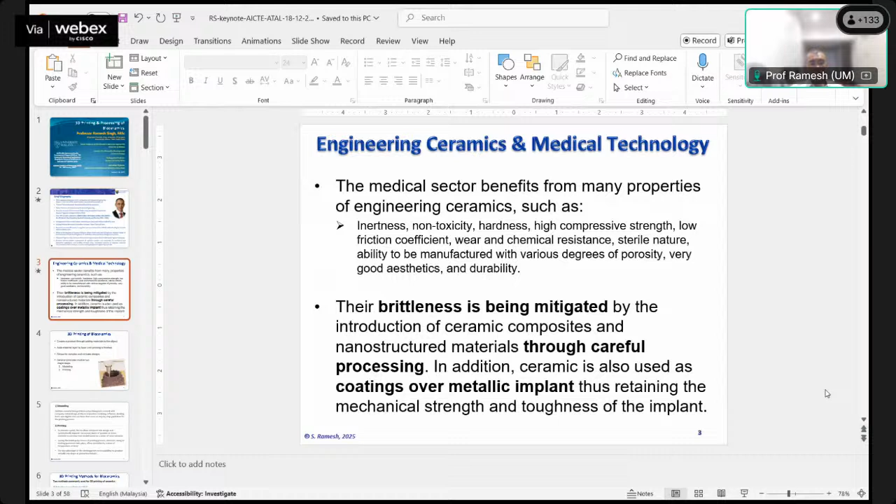There are a lot of ways bioceramics are formed. Traditionally, or the conventional method, is through die pressing, whereby we develop a mold and use powder to compress it into shape. Then after that, we eject the parts, and subject them to subsequent processing like sintering and so on.

Over the years, researchers have also developed injection molding ceramics, where machines are developed to allow, similar to plastic injection molding, you can also inject ceramics to make parts. But again, the limitation is always the brittle nature of ceramics. You always need to mix it with polymer, because this processing requires a flexible stream of material, and ceramic in its own nature is brittle, so it's very difficult.

In recent years, researchers have focused on 3D printing of bioceramics. This 3D printing has its advantage because it allows near net forming of structure. It builds layer by layer, just like rapid prototyping of metallic components, so it's of a similar nature. This process creates an object by laying layers of material until the full structure is formed, allowing for complex and intricate design of components.

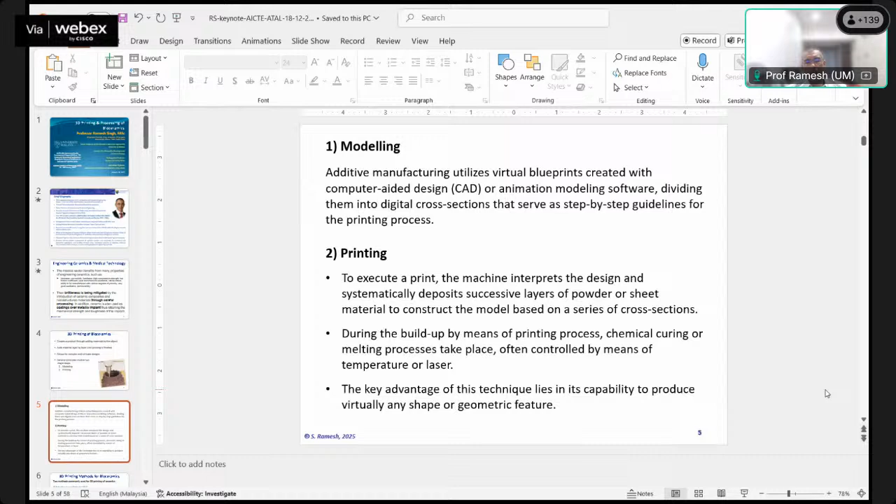During the printing, a layer of powder is laid layer by layer based on the model you have developed in your CAD or animation modeling software. There are two main common methods used for 3D printing of ceramics.

The two common methods are SLS, selective laser sintering, and FDM, fused deposition method. SLS takes after rapid prototyping, where we use laser as the heating source. The structure or component you want to make is sintered simultaneously as the object is being printed using laser. The laser helps melt the particular material, especially the ceramic material, at a particular temperature and deposit it onto the surface as it builds.

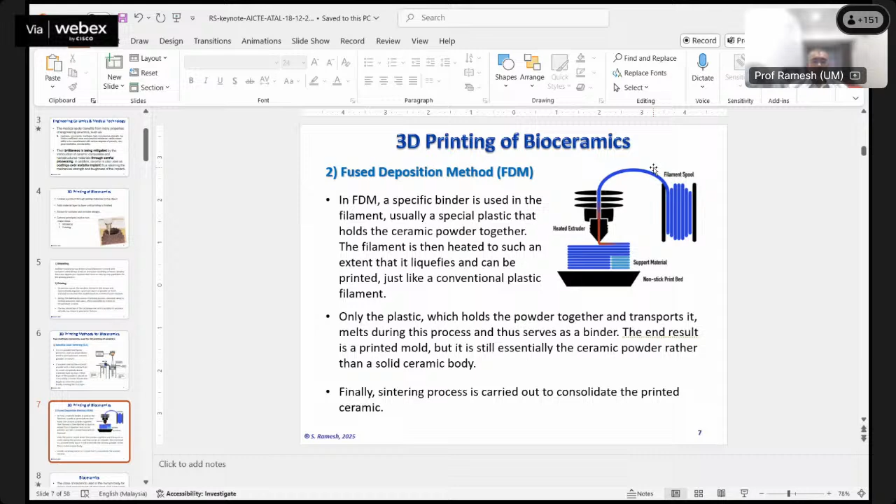In Malaysia, we don't have a company that develops FDM for ceramics, but we have a lot of FDM used for polymer-based printing, so that is not an issue. In fact, one of my PhD students, even in China, has made the material and made the machine himself. You can go to YouTube—there are a lot of channels that teach you how to make a simple printer so you can print polymeric materials. But for ceramics, as I said, the challenge is always with the filament.

In terms of bioceramics, when we talk about ceramic materials, there are many classes: traditional ceramics, advanced ceramics, and the class of bioceramics. My PhD was not in bioceramics—although my degree is in mechanical engineering, I took a project using ceramics for mechanical applications, focused mainly on high temperature and high wear resistance applications like cutting tools. During my PhD I developed zirconia ceramics for cutting tools, but subsequently I branched into bioceramics.

These are classes of ceramics that can be used in the human body for replacement of diseased or damaged parts. Normally people get involved in accidents and break or crush their bones, and these bones can never be replaced in a natural form—it will take a very long time, or maybe never happen. Therefore, to assist in the healing process, bioceramics have been developed and used as a substitute.

This allows the hard tissues to heal, and especially calcium-based bioceramics allow fusion into the bones and the human skeleton structure. So there will be infusion, and therefore it becomes permanent—the body thinks that this bioceramic is part of the skeleton structure.

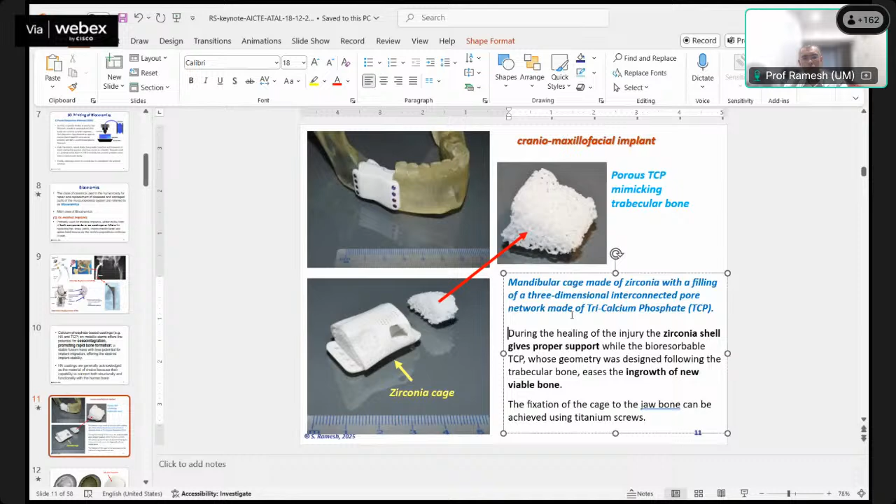For skull implants as well, especially for cancer patients who have cancer in the brain, in order to remove the cancer the doctor normally has to cut through the skull, creating a hole. Thereafter, in order to protect the soft tissues of the brain, in the past metal was placed over the section where it was cut in order to protect it, but these days we can use bioceramic because this area will not be subjected to loading.

Obviously once someone has part of their skull removed and replaced by a bioceramic, the person cannot have an active sport life. Because although hydroxyapatite has the strength and hardness to protect, for example to play football and so on it's not advisable, because it can crack when the patient hits the ball. So normally it is used only to protect the soft tissue of the brain to allow healing to take place, and this remains permanent there.

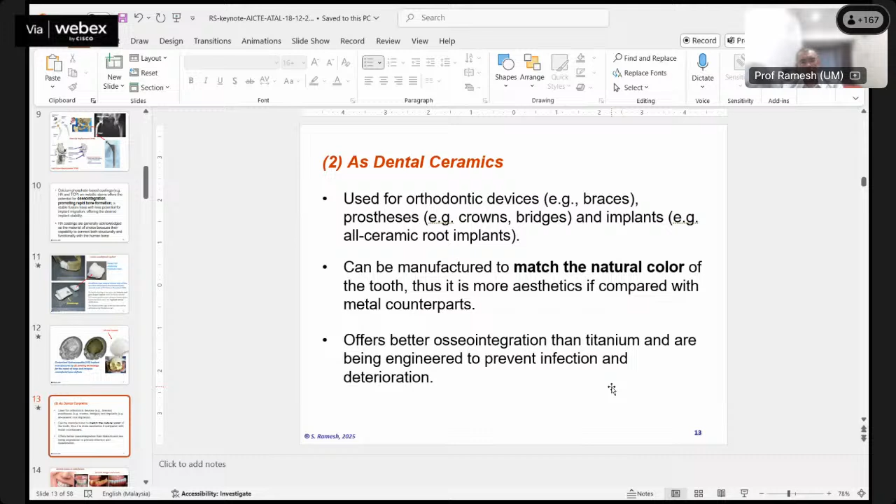Bioceramic can also be used for dental applications, and this is something I have worked on with one industry in order to develop artificial implants, for orthodontic devices, braces, prostheses like crowns, bridges, implants, all-ceramic implants, and so on. This is very common these days. Especially for adults, once we lose our tooth, we will never be able to have a natural tooth again, so we need to replace it with an artificial implant. Ceramic serves very well in this section. You can also use titanium, and in the past titanium has been used, but these days ceramic has been used.

There are also titanium implants where the implant is made out of metal but the head is made out of ceramic. That's also possible, but the problem with the metallic implant is that when it's screwed into the jawbone, over time there will be an effect of loosening because the metal is very hard, causing wearing of the bone structure. Over time as patients bite and eat, there will be movement, so after certain years there may be a need to replace the stem with a bigger diameter stem because of the loosening.

But with all-ceramic implants, it tends to allow osteointegration to take place, especially if it's made out of hydroxyapatite, or the stem is coated with hydroxyapatite. This allows good fusion, good interlocking with the jaw bone material, so it binds well and holds it in position, and therefore you won't have this loosening effect. That's why a lot of people opt to use all-ceramic dental implants.

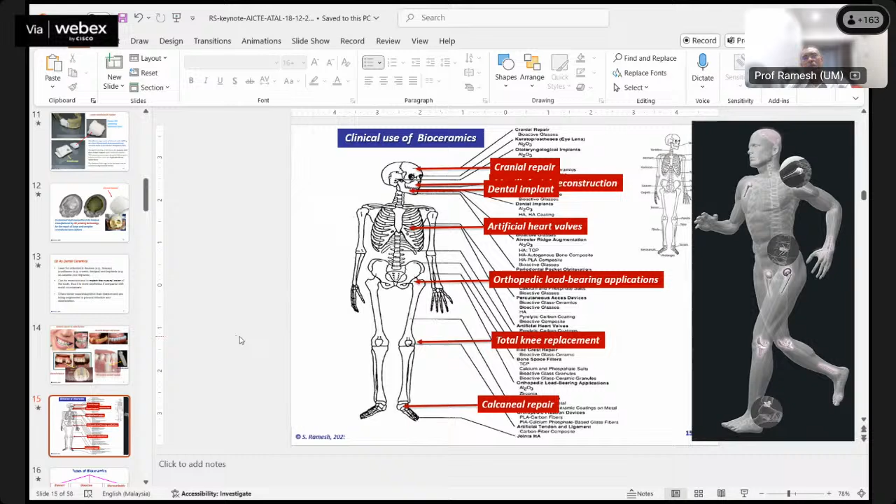So these are some clinical uses of bioceramics. There are mainly three types of bioceramics: bio-inert, bioactive, and bioresorbable. Bio-inert means it is completely inert - it does not have any chemical reaction with the body. Bioactive means there is some chemical reaction whereby osteointegration can take place - there is integration when we say bioactive.

When we say bioresorbable, what it means is that it is there for a temporary period, and thereafter it gets absorbed by the body, like TCP, tricalcium phosphate, a bioresorbable ceramic material. So these are the three classes of material.

Hydroxyapatite has been used because when we zoom into our bone structure on a micro or nano scale, we see that the crystal that makes up the collagen fiber inside our bone consists of crystals of hydroxyapatite. That's how researchers realized that if we can develop artificial calcium phosphate based material, the body will accept that particular ceramic. Based on this understanding of bone structure, hydroxyapatite has been developed and is being used very widely.

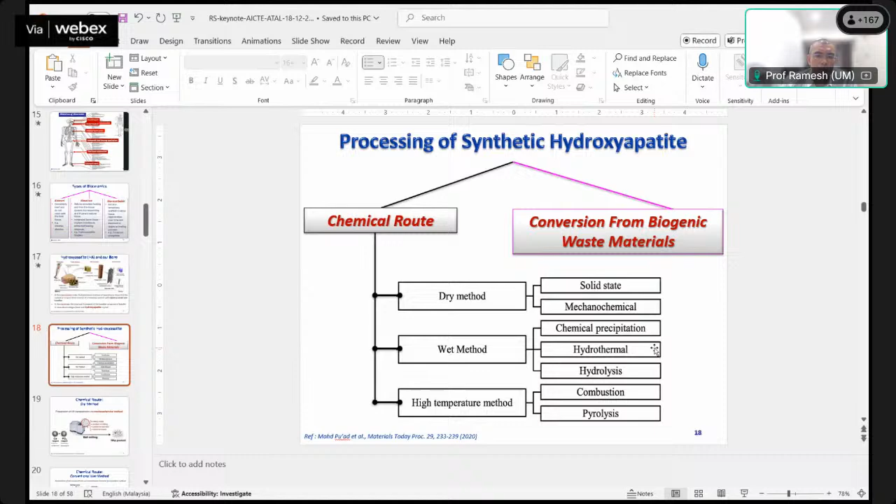This high temperature method is good for research—it's nice for publishing papers and so on. But most of the hydroxyapatite available in the market is developed through the chemical precipitation method, because it's easier, easy to control, and you can scale up.

These few slides show the principle of each of the techniques, so I'll go through them a bit quickly, starting with the mechanical chemical method—basically, mechanical means there is a mechanical assistance.

So like ball milling or planetary milling, this is through a mechanical form, that means rotation. Electrical energy converts into rotation energy through some mechanical device which allows the rotation to take place. That allows the chemical reaction between the agents we use, typically a calcium agent and a phosphate agent, calcium carbonate and dicalcium phosphate. During this mechanical chemical process, the byproduct will be hydroxyapatite.

Then we also have the chemical conventional wet method. When we look at the wet method, this is very straightforward, the chemical precipitation method. I am one of the early pioneers in this chemical precipitation method. This has been done for almost 20 odd years, 25 years ago.

It's very simple. All you need is a calcium agent, most of the time we use calcium hydroxide. We mix it in liquid, so we dilute calcium hydroxide into liquid, and then we take phosphoric acid, we dilute it in liquid, at a certain ratio. This is where the challenge comes in, how we control those ratios.

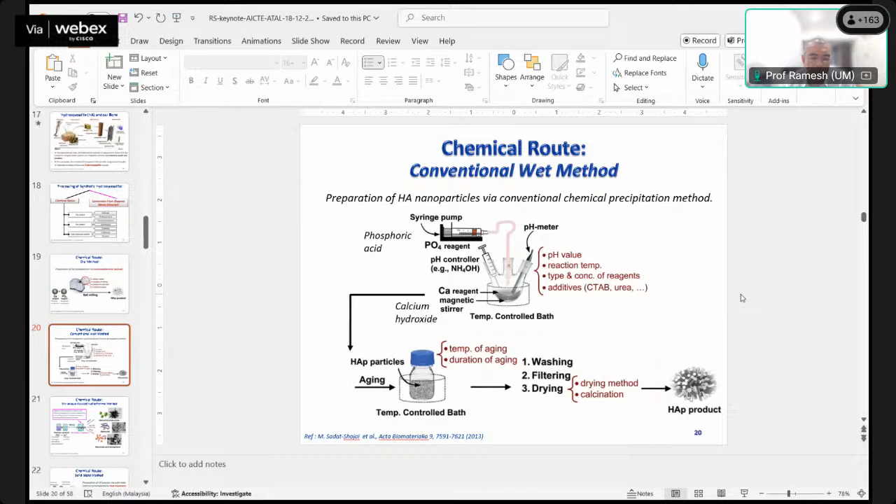I've not done the microwave assisted hydrothermal method. I have always stuck with the chemical precipitation method because, based on the readings I've done, the chemical precipitation method is much more superior in terms of yield, reproducibility, and quality.

Rather than using other techniques. Other techniques are good to publish papers. You do a little bit of mixing here, change a bit of parameter, you can write good ISI papers. You get a nice structure and then you can publish. But for application, I think it's a bit difficult to scale up in order to control the required morphology.

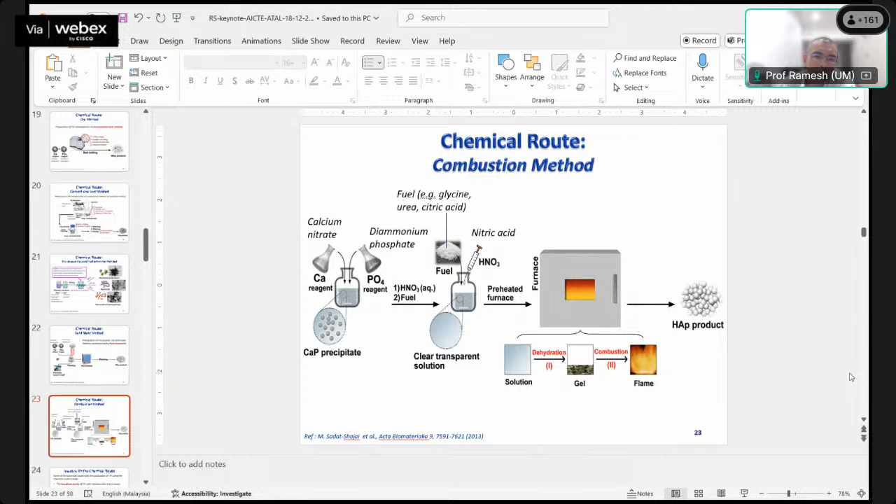You get very little yield when you use this technique, but for research, for a PhD or master's research, it's fantastic. You get quite good results. You can play with the parameters and get different morphology, different properties. You sinter them, test them, then put them through biocompatibility studies, so you get a lot of results. It's nice for publishing papers, so a lot of people have used this technique mainly to publish, making comparisons showing the viability of the combustion method. So these are some of the issues with the chemical route.

Remember, there are two routes to produce HA. One is the chemical route, and there are some issues with this route. One issue is the purity of the HA through the chemical process. Normally the powder produced from these techniques, even chemical precipitation, is not highly crystallized, so you need heat treatment afterward to obtain a highly crystalline material.

You also have problems with agglomerates with this chemical route, as I mentioned, that's always a challenge, along with instability of the hydroxyapatite itself. As you saw, different structures form - some look like a star, some rod-like, some spherical. Normally we find the rod-like structure is more stable than the star-like or round circular particle forms. So the rod-like seems to be very stable.

Depending on how you process them, you get different morphology, and that influences the stability of the hydroxyapatite phase when you heat treat or sinter it. Sometimes you get secondary phase calcium phosphate formation, like tetra calcium phosphate (TTCP), or even calcium oxide being formed. These are considered impurities, although the body can accept TTCP or CaO. But when used for a solid HA implant, which we want to remain as an implant for a long period of time, once degradation takes place and HA transforms into a secondary phase, it causes an issue - it loses its integrity.

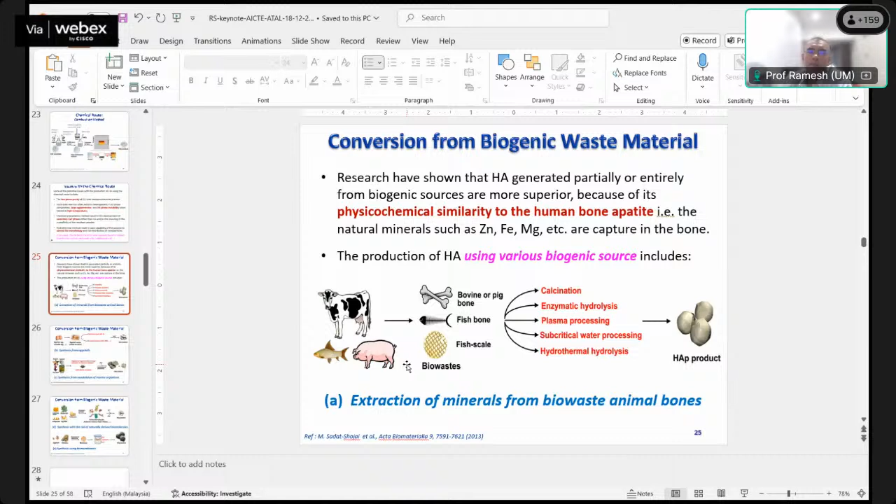I've worked with bovine as well. I haven't tried pig bones, because from research that's been done, it seems pig and chicken bone don't work as well. I've tried chicken, but chicken bone is too soft, and the hydroxyapatite byproduct made from chicken bone does not have very good mechanical properties. Fish bone is the same - it can be a good calcium source, but when you test the mechanical properties of the resulting hydroxyapatite, it is not as good as using eggshell or bovine bone.

So, synthesis from eggshell - a lot of my work has focused on using eggshells, whereby we clean and crush the eggshell, burn the calcium carbonate away, and get pure calcium. We calcine them. It gives out a very terrible smell when you burn eggshell, so you need a proper enclosure for extraction when burning eggshell.

And the byproduct is a white color powder, and that powder is pure calcium. Subsequently you subject it to normal chemical processing, mix with some phosphoric acid and so on, go through the chemical process, and you will be able to obtain HA product.

So synthesis from eggshell is very straightforward. You can also use shells - this is another method that has been used, but again it is more for research purposes, because of the issue of yield and the technique involved. Sometimes these techniques use toxic chemicals, and the byproducts are toxic, so it is not viable for scaling up. So we can use marine organisms in order to convert their calcium into HA product. That's possible - these are some of the options.

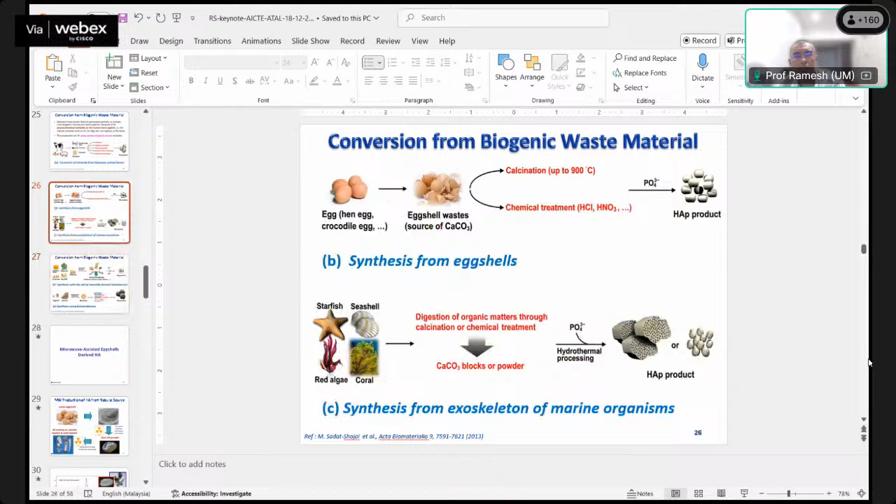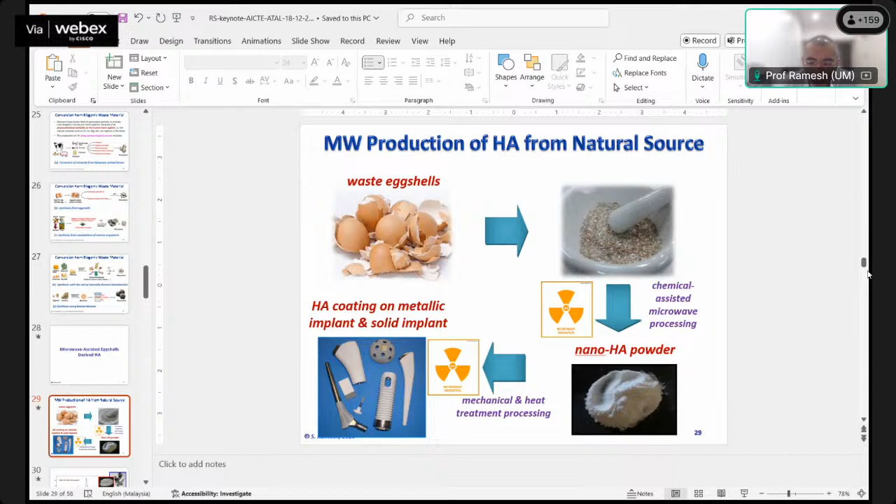All right, so these are the powder. As you can see, this is the HA powder that we developed. We produce nano powder, so they are mainly rod-like powder. And this is the micrograph of the nano powder that we have developed in the lab.

So one day I had a problem with my wisdom tooth - that was sometime years ago, maybe about 10 or 15 years ago. While my tooth was getting extracted, I was thinking of the work I was doing. And when the dentist threw the pieces of the tooth into the beaker, I looked at it and said, hey, I told the dentist I would like to take the tooth. He said, okay, it's up to you. So what I did was grind the surface and do the X-ray.

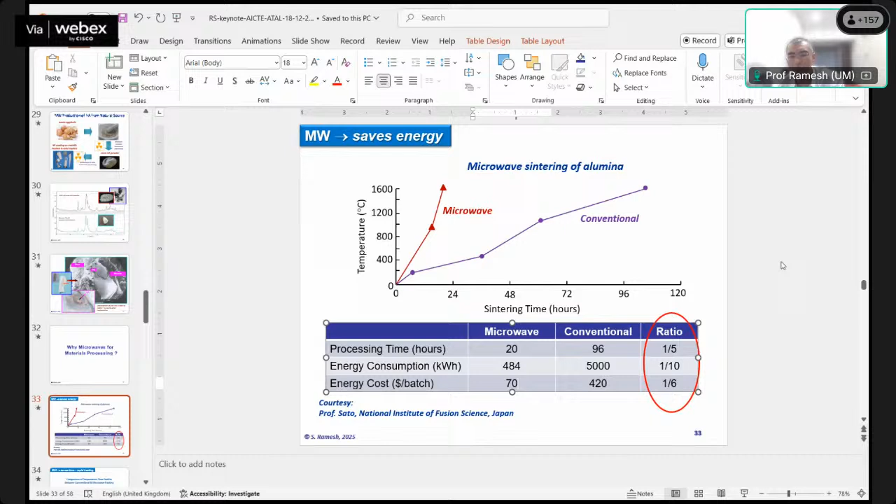The energy consumed is obviously less when you use fewer hours, and of course the cost is related to energy usage, so it's cheaper. It's 1/6 cheaper, 1/10 lower in terms of energy consumption, and 1/5 lower in terms of the time to process alumina ceramics. So rapid heating - here's a profile.

Do you know that with a household microwave, with proper insulation and a little bit of modification, using a 1200 watt or 1500 watt rated household microwave, you can actually get temperatures as high as 700-800 degrees centigrade? But you need proper insulation and so on.

So for research purposes it's nice, but for commercial use you would need a proper microwave furnace. So I have a proper 6 kilowatt microwave furnace - it's a big furnace which we use for a lot of microwave work.

So here's some principle. When we look at the differences in heating mechanism, microwave is basically volumetric heating. Once every particle receives the energy, it starts to create heat, as compared to conventional, where heat is transferred from the outer surface to the inner surface through a radiation and convection process.

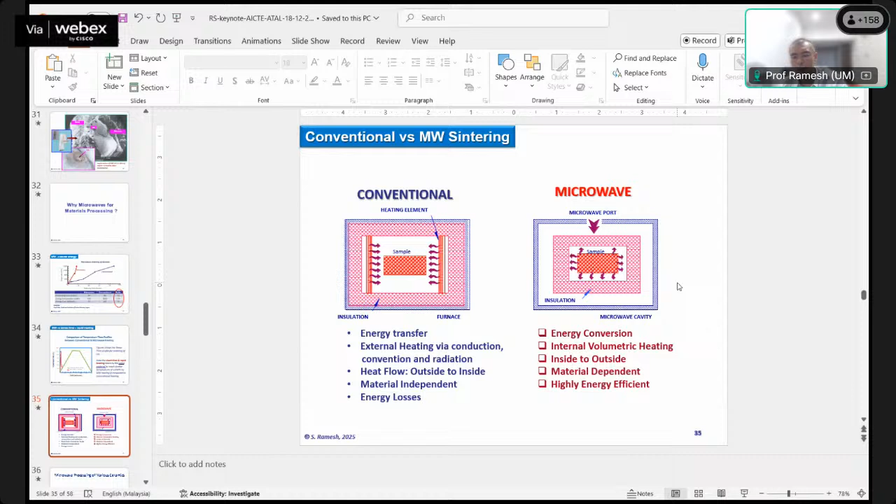So that's some of the challenges with sintering ceramics using microwave. Now some examples of microwave processing: alumina. As you know, alumina needs to be sintered at high temperature for a very long period of time.

As a result, you have grain coarsening. When the grain gets bigger, you lose mechanical strength. So this is the issue, and the challenge with sintering alumina is really to minimize grain growth so that you have higher mechanical properties.

This typically shows the structure of conventionally sintered alumina, where it is not possible to get high density at a low temperature of 1350 degrees holding for 2 hours. At 1350 for 2 hours, the density is only about 65% dense, and the structure is porous.

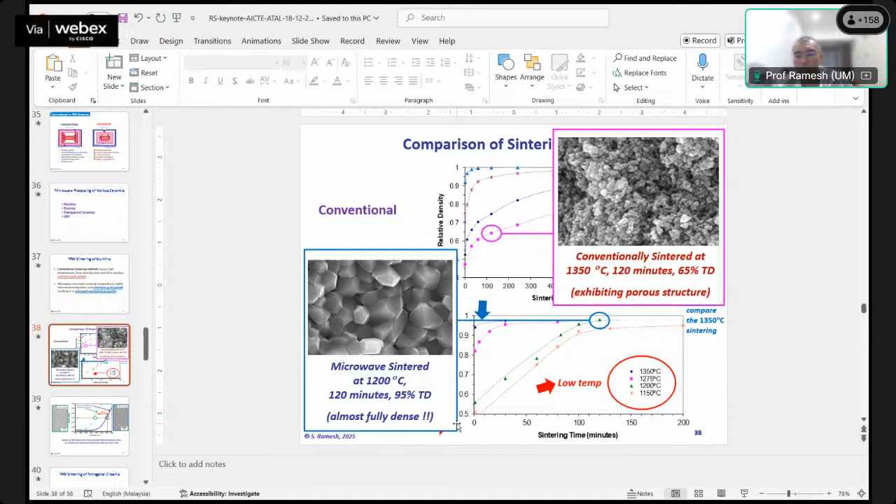But on the same count, we find that when we compare with microwave, keeping the time same at 120 minutes and the same temperature of 1200, in this case different temperature, this is higher, this is lower. So for the same condition, except for lower temperature, the density is already 95% dense. So we can see there is an advantage of using microwave to sinter alumina.

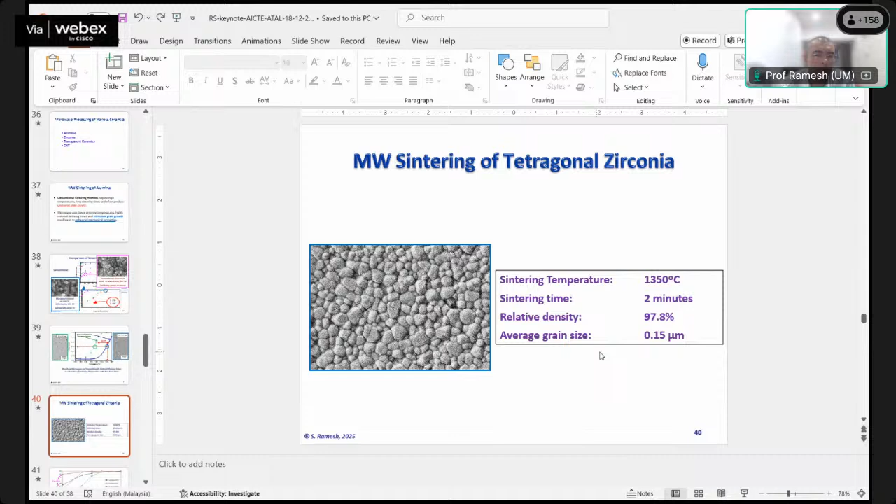For zirconia as well, we have done a lot of work. You can keep at low temperature for as low as 2 minutes. We are able to obtain 97%, 98% dense with an average grain size of about 0.15 microns. So this is another work I've done using microwave. You know that if you work with zirconia, it is not possible at 1100 degrees centigrade to get at least 95% dense, right? So part of this PhD work was to try to enhance the low temperature sintering capability of zirconia.

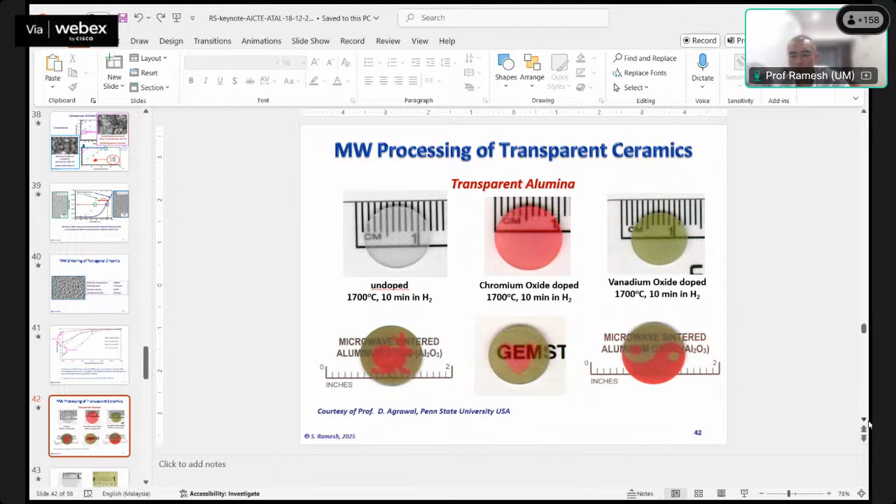These are some examples where the ceramics are fully dense and tend to become transparent. These are not from my lab, but from my collaborator, Professor Dinesh Agrawal from Penn State. He is our professor icon, and he works closely with me in the development of this microwave, because his group is the pioneer. Those who are familiar with Professor Dinesh Agrawal know he has just retired from Penn State, so he doesn't do much research these days, but I'm still in very close contact with him. So these are some of the pictures he has sent of work done on various different ceramic materials. As you can see, they are transparent.

And this is one area we must take care of, because if we put an implant where the maximum load is undertaken by the implant material and not by the natural bone material, eventually the natural bone material will get weakened. Our bone structure needs to be subjected to loading. If it is not subjected to loading, it tends to lose its calcium. And that's where, as I mentioned earlier, the body thinks that when you don't exercise, that's why as you get older you need to really do a lot of exercise, because you should not allow your body to think that your skeleton structure does not require strength, and therefore the body will extract calcium from the skeleton structure.

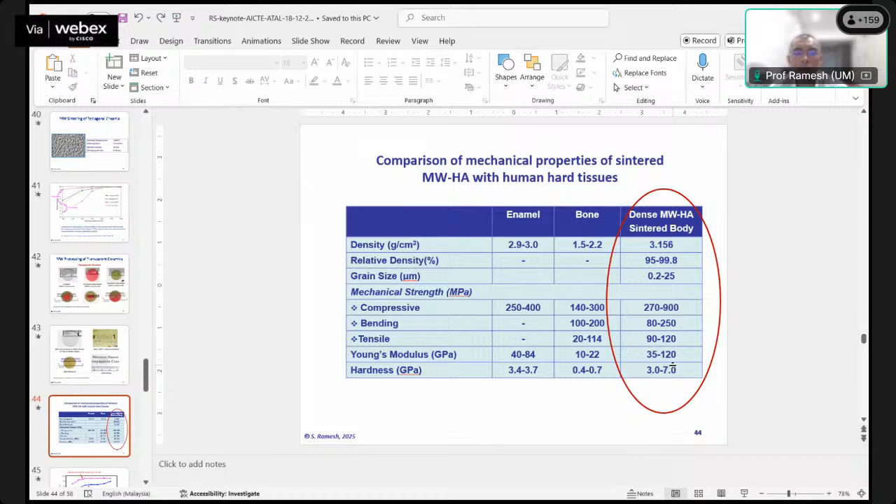So if you're active in sports, that sends a signal to the body that you need strength in your bone, and therefore your system will have to work hard to extract calcium from the food rather than taking it from the bone. So these are other properties.

Just to compare, microwave sintering at 30 minutes at 2.45 gigahertz, as compared to conventional sintering at different temperatures, you can see it is much better in terms of densification. Conventional is done for 24 hours, microwave is done for 30 minutes at the same temperature, so you can see the improvement in densification.

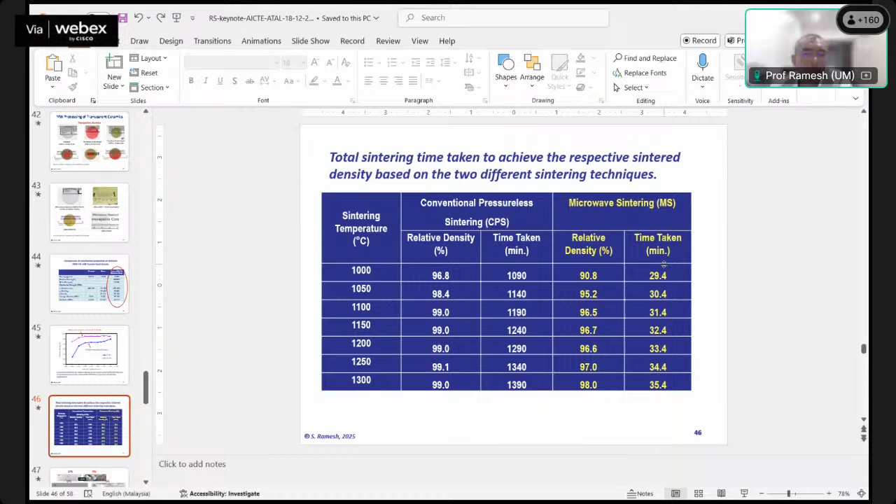This shows the similar thing in table form. I think what I want to highlight is, if you look at 1000 degrees centigrade with conventional sintering, in order to get a relative density above 90%, it takes about 1000 minutes, as compared to microwave, which takes only half an hour to get above 90% dense. So the advantage is there.

All right, so that's on hydroxyapatite. We also work on zirconia. Zirconia can exist in 3 structures: monoclinic, normally in the powder form, and as you heat it up it goes into tetragonal and then cubic, and on cooling it transforms back. This is for pure zirconia, showing the polymorphic transformation that takes place.

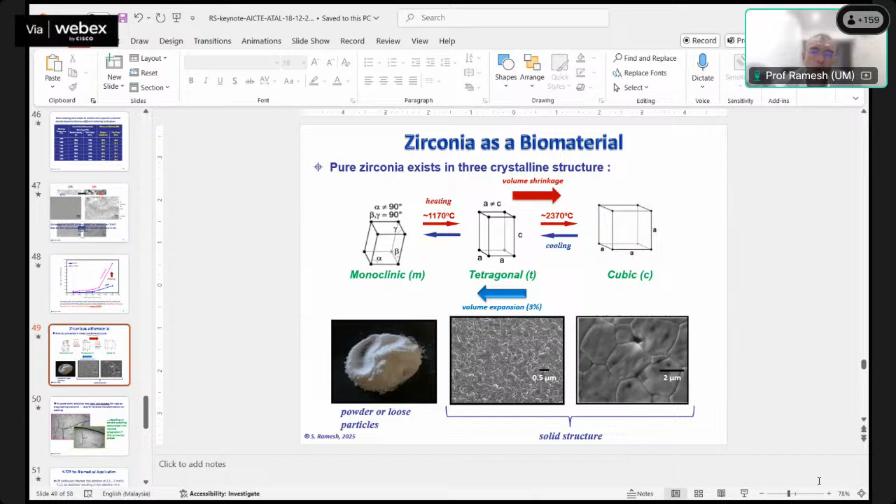In order to ensure that the reverse transformation does not take place, pure zirconia is normally not used in its pure form. It is normally doped with a stabilizer like yttria, cerium oxide, or magnesium oxide, and so on. In the pure form it is not used because on cooling there is expansion, from tetragonal converting back to monoclinic, and as a result there's severe cracking.

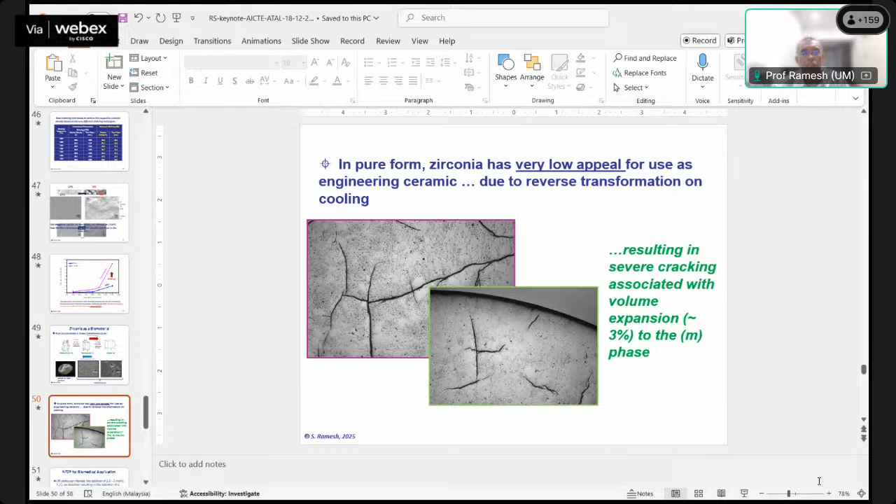So normally for biomedical applications, it's the tetragonal zirconia polycrystal, TZP, or Y-TZP, where Y means the stabilizer. It's stabilized with 2.5 to 3 mole percent yttria. With this stabilizer, you're able to retain the tetragonal structure at room temperature, giving the highest mechanical properties.

So this is some comparison of Y-TZP, the tetragonal zirconia polycrystal, with some typical metals. As you can see, the Young's modulus of Y-TZP is almost similar to steel, and that's why Y-TZP is sometimes known as ceramic steel.

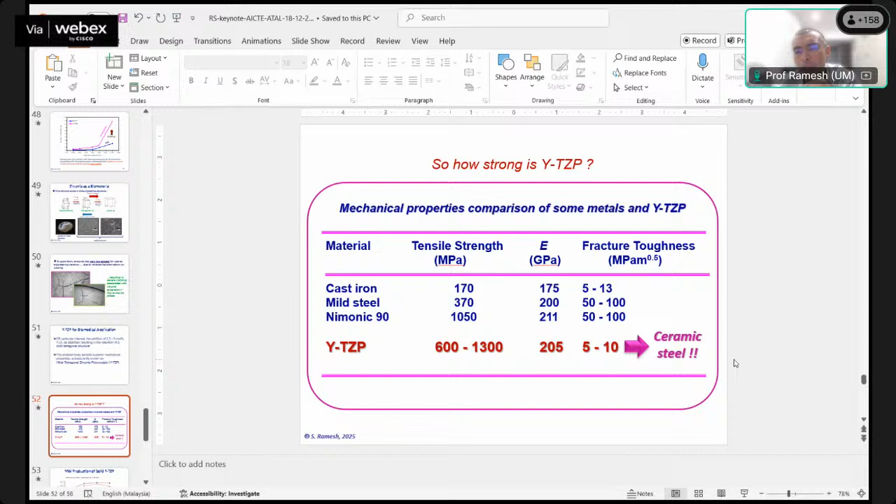Okay, I don't know if I can play this. Let me try. Can you guys see this?

Yes sir, yes sir. Okay, some of the applications: grinding media, sleeves, pump face, hip replacement, knife. This is a cutting tool that I've developed for commercial purposes, and of course for dental implants.

We have also made porous zirconia. This is for a company where I'm a consultant, Best Tool Manufacturing in Thailand. Can you guys see this figure?

Yes sir, you can see this, huh? Okay, this is another work that I've done. These are drill bits, zirconia drill bits that I have developed together with the company in Thailand. I'm a consultant for this particular company, and what they have done is make ceramic zirconia cutting tools for drilling purposes for dental use to replace the metallic tools. Our tooth is very hard, and during replacement, using the metallic tool wears off very quickly, so the company developed zirconia drill bits for dental application.

So I helped them with the processing part, identifying the best sintering conditions for their tools, selecting materials, and developing strategies to enhance their mechanical properties. These are other tools that have been developed by the company in Thailand. And that's it. I think I've taken enough time.

So a lot of my work is really focused on developing this particular ceramic material for mechanical-based and for biomedical-based applications.

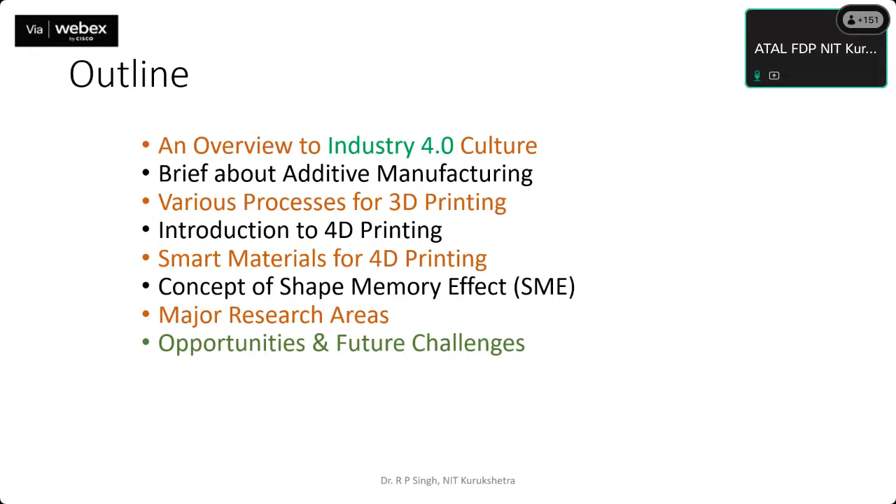Then we will discuss various major aspects and opportunities. Here, the very basic fundamental is the paradigm shift from Industry 1.0 to Industry 4.0, which is the current perspective. In the very beginning, in the late 18th century, it was the era of mechanization and the introduction of steam and water power. One century later, in the late 19th century, it was the time of mass production assembly lines and the utilization of electrical power. Next came Industry 3.0, the later phase, when automation came into picture with the use of computers, IT systems, robotics, etc.

And next to that, it is the current scenario where we are dealing with the smart factory, the autonomous systems, Internet of Things, machine learning, etc. in the current perspective. So these are the different paradigms, how things are just being shifted from Industry 1.0 to Industry 4.0 up to the current perspective.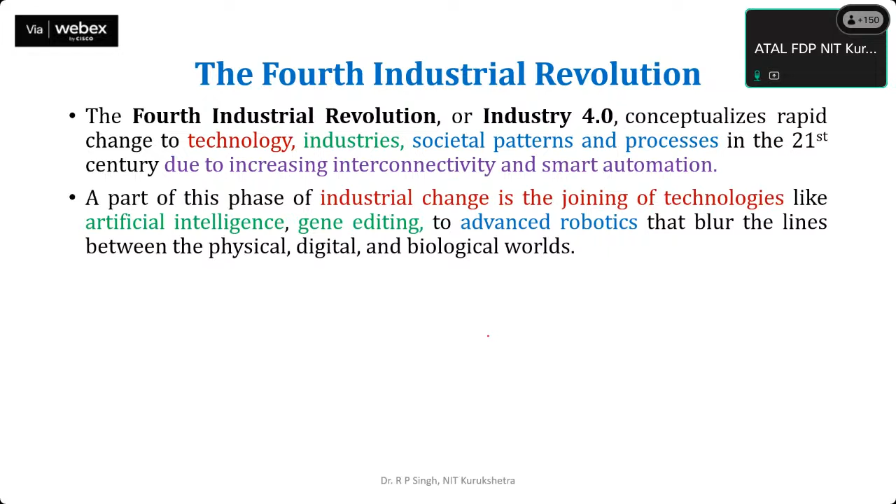So it is the time where we are dealing about the technology, industry, societal patterns and processes in the 21st century due to increasing interconnectivity and smart automation. A part of this industrial change is the joining of technologies like artificial intelligence, gene editing, up to advanced robotics. So we are dealing with all these aspects through ongoing automation of traditional manufacturing and industrial practices.

It is very interesting here. This integration is all about improving the overall communication, self monitoring, and the use of smart machines, etc. So as you can see, Industry 4.0 has various enablers and smart technologies for the fourth industrial revolution so far.

So it is associated with autonomous robots, simulation aspects, system integration, IoT, IIoT, big data analytics, cloud computing, and very interestingly, it also has the consideration of additive manufacturing. So you can see it being highlighted here. That's an integrated part of Industry 4.0 and we can't ignore it. To enable the fully functioning of Industry 4.0, this aspect cannot be ignored.

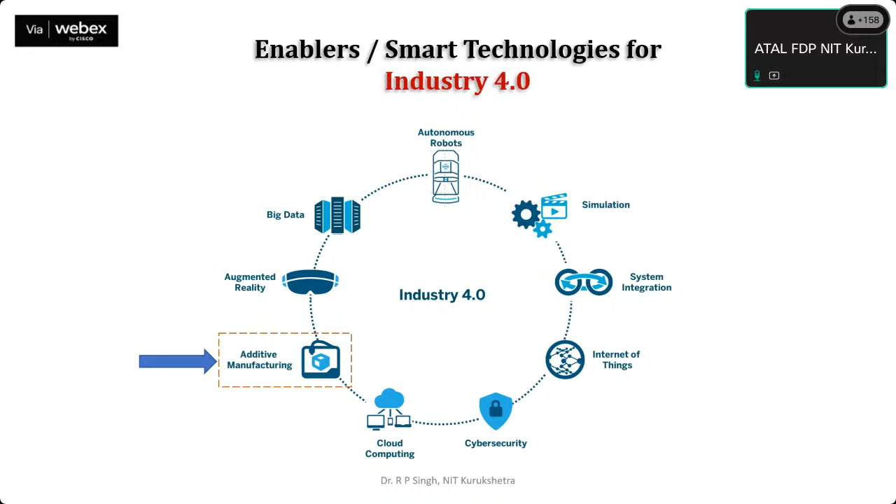Obviously, on the basis of this particular theme, this FDP was planned up to the applications in the biomedical area. It is also called 3D printing, layer by layer. Various experts, Dr. Naren, Piyush, Dr. Sundeep sir, and many others, even Kote sir in the previous session yesterday, discussed various aspects of it. So it is often called digital manufacturing, rapid prototyping, solid freeform forming, etc.

So it just starts with forming a CAD file, STL, and the sliced version. Based on that, it is then additively manufactured layer by layer, and if the finishing of the end part is not so good, post processing can also be applied.

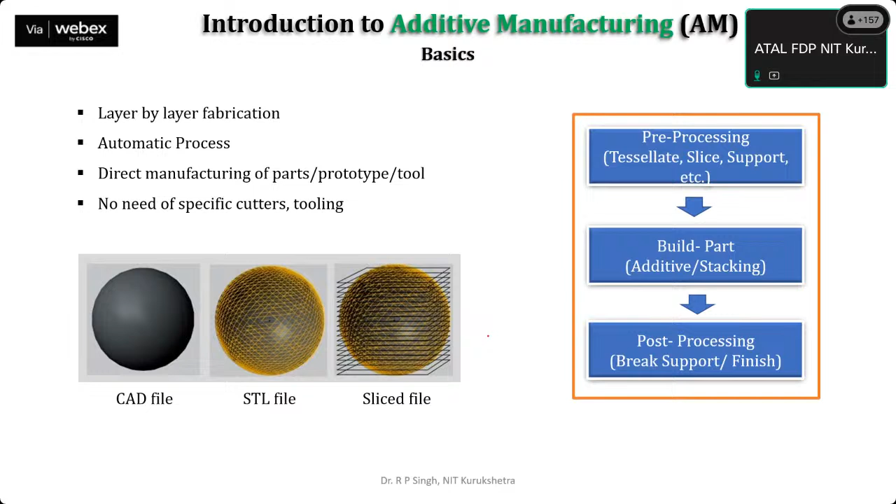Obviously, in our previous class yesterday, Piyush very clearly highlighted the aspect of support systems and post-processing, and how and where it is applicable to 3D printed parts.

So again, this is a one-to-one discussion about vat photopolymerization, but since a lot of discussion has already been made by our previous speakers, I'm just overviewing all of these.

So it is the discussion about vat photopolymerization, where liquid resins are deposited over the elevator platform, where the product is printed out.

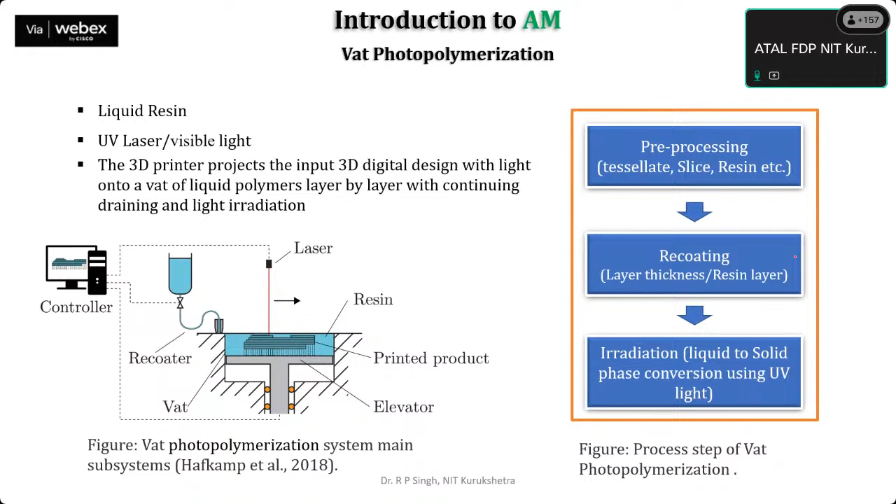This is the process of binder jetting this time. So it is very obvious here, we are just binding the metallic materials in powder compact form. Once it is sintered, with the help of the binder material, it is spread over the surface, and the extra binding materials can be cured, as you can see in this figure. Here I am highlighting with my laser pen. So here we are curing that additional provided part, so that ultimately the part can be cured and the additional binder material can be cured out.

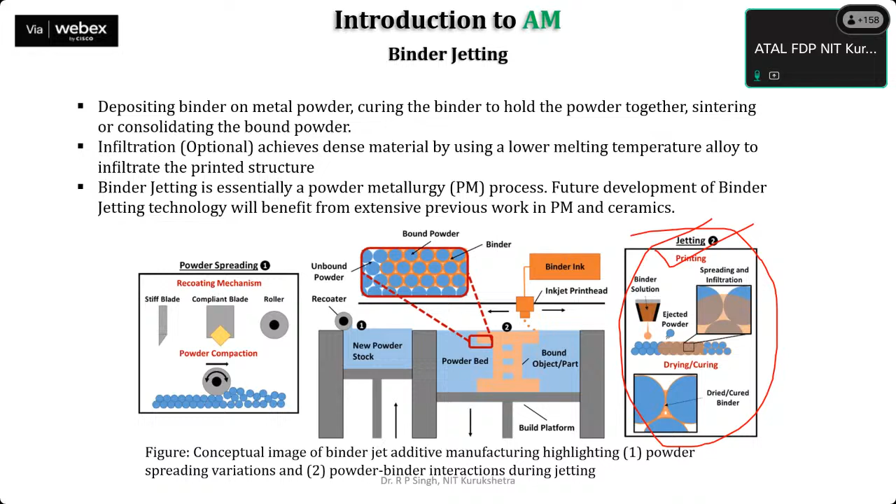This is the most commonly utilized method, material extrusion here. Almost all institutions have small setups of this methodology. So they can be either plunger based, filament based, or screw based, depending on the shape of the raw material being utilized. If we are utilizing pellet based material, obviously the screw based method must be applicable. If spools are used, meaning a reel kind of form, materials like PLA, ABS, PC, PP can be used. So multiple availability is there in the market.

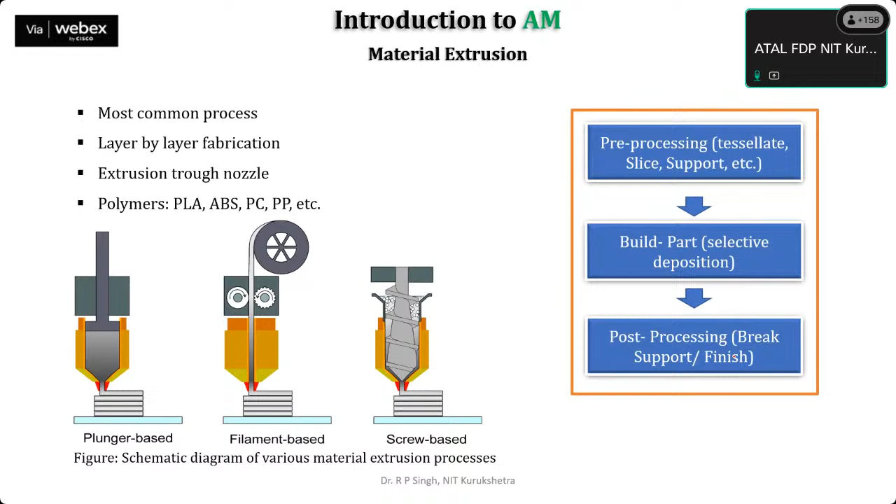There will be a build platform and the printed part. Based on that, the laser beam must be targeted over it.

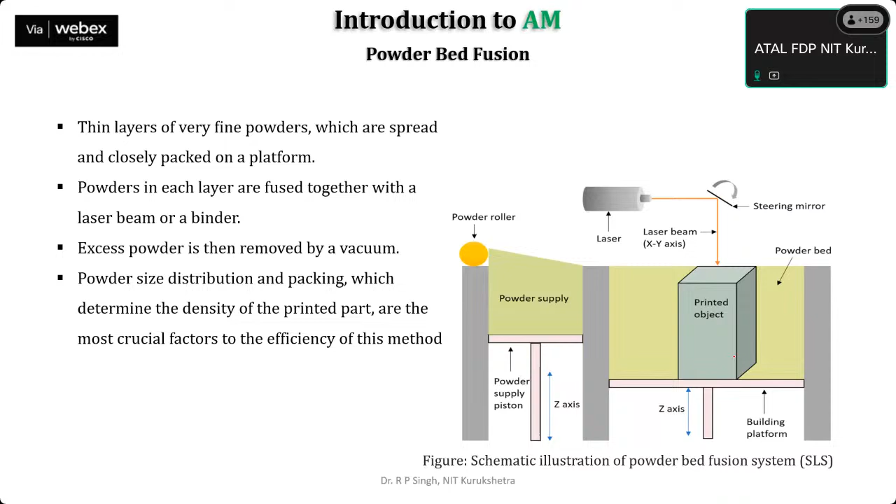So very fine powders are being utilized, and the excess powder form is then removed by the vacuum scheme. In direct energy deposition, the powder form raw material can be utilized, or in wire form. If the wire is being fed, that philosophy is fundamentally known nowadays as the WAAM process, which is wire arc additive manufacturing. So that's the WAAM process here. Both are fundamentally similar.

So why is there still a need for 4D printing? Versatile applications are there, but also some associated limitations, because some complex geometries and some typical applications are very hard to get manufactured through the 3D printing methodology. So we have to go for that.

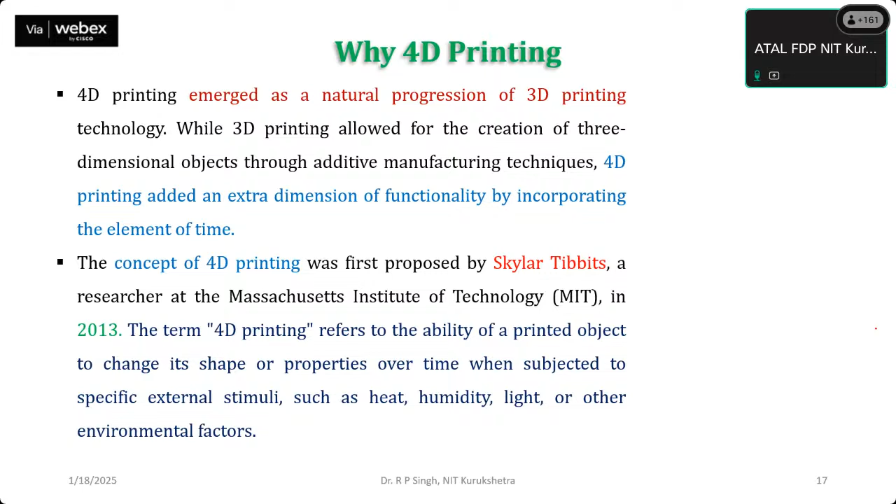If we fundamentally talk about 4D printing, it is an extended dimension in terms of time, we can say. It provides an additional dimension to the already 3D printed parts. It was the time when the term was coined by Skylar Tibbits, a researcher at Massachusetts Institute of Technology, MIT. In 2013, he coined the term 4D printing, and he was working in the Self-Assembly Laboratory there.

He coined this term for a printed part capable enough to behave differently under the effect of heat, humidity, light, etc. These things are called external stimuli. If our 3D printed part is capable enough to behave differently under various conditions of certain external stimuli like heat, humidity, moisture, light, temperature, a lot of stimulus can be used, that can be claimed as 4D printing, because our printed part is going to behave differently under atmospheric conditions.

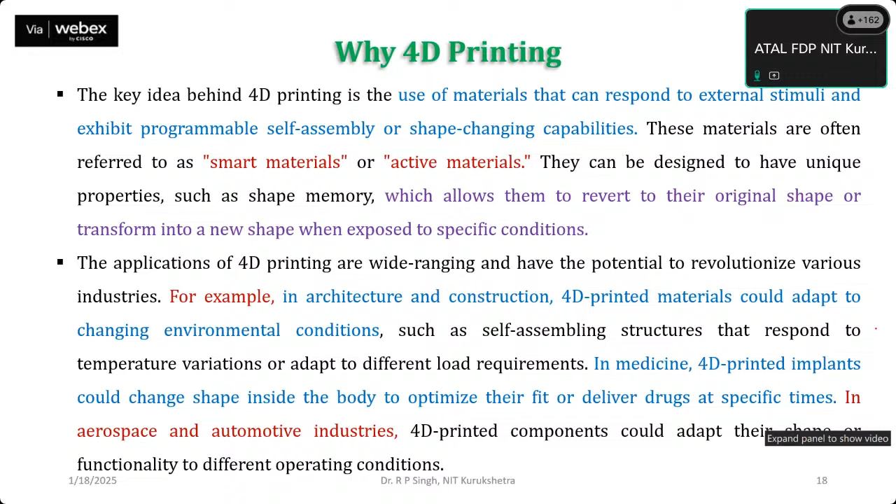So the idea is that we have to go for some smart materials, also called active materials. They have a versatile capability to respond to external stimuli. So they have to be programmed. It is not simply a static sample you have prepared; you have to go for dynamic printing. How that can be done and how it fundamentally differs, we will discuss in our coming slides.

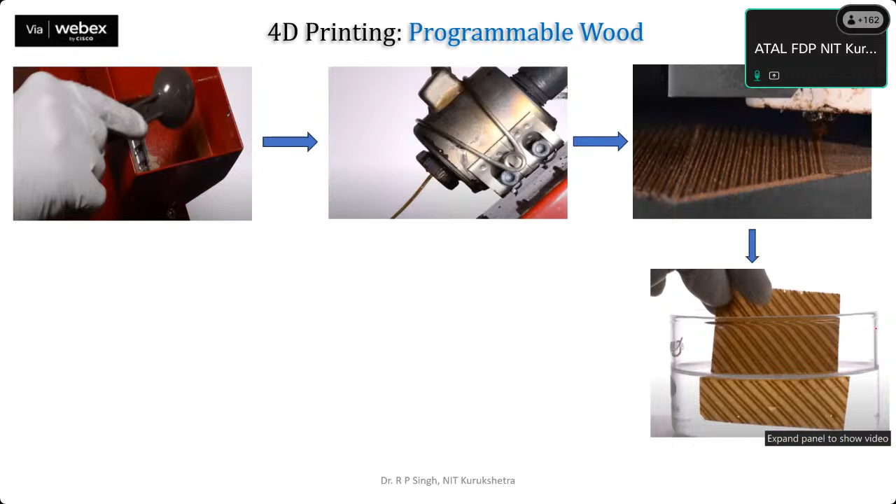Once the printed part of this wooden material is done, it is dipped into a smart solution. After the solution is soaked up, once the temperature keeps on changing, the image, or we can say the behavior of that printed part keeps on changing. So earlier it was like this, and now it's different, and these images are not random. It is very clear that these are well planned, as was the desire of the manufacturer or developer.

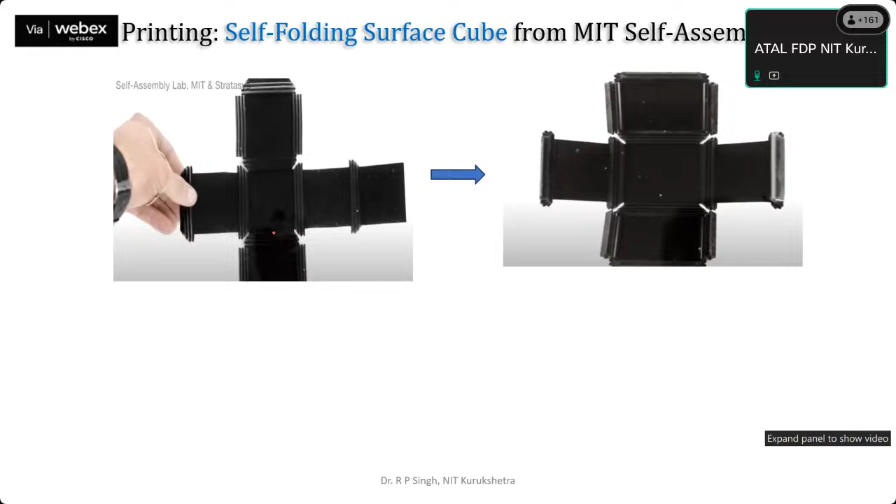Another example is very similar, like the self-folding cubes. Earlier, they have been printed with smart materials, and then for some specific applications, all the 6 faces or 6 face surfaces of that cube are printed separately, attached to each other. But once they have been programmed and allowed to be given one solution, their wings come closer, and that cube is developed.

That's why it is called a self-folding surface cube.

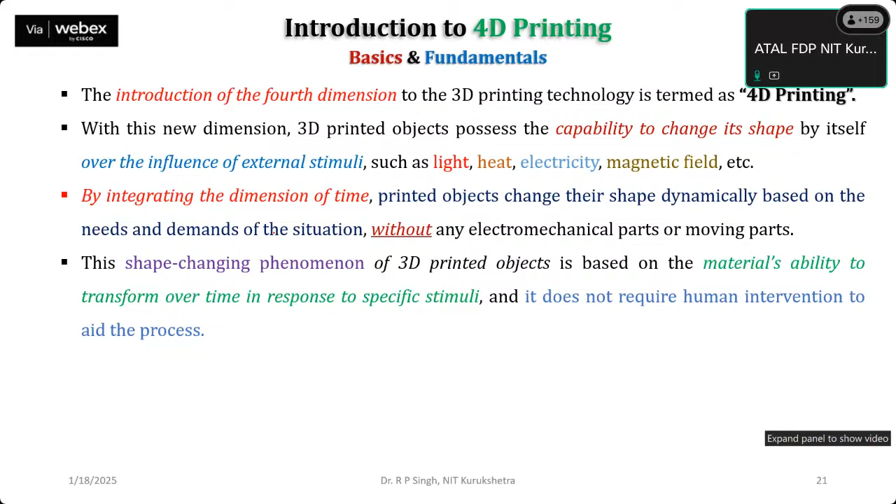So how is this all happening - these are the principles and guidelines of 4D printing. Based on the applications discussed earlier, you can have some fundamentals in mind about what exactly these applications are doing. These are cases where human interventions are not possible, so to avoid that scenario, some robotic attachments can also be made. Fundamentally, the introduction of the 4th dimension to 3D printing technology is called 4D printing. These are the abilities - the new dimension can have the capability to change its shape through interventions of light, heat, electricity, magnetic fields, and humidity as well. By integrating the dimension of time, the printed object has the capability to change shape dynamically, without any electromechanical or moving parts.

If we talk about versatile applications, there are many applications involving structures like bending, elongating, and twisting, which are required in applications like microtubes, soft robots, and toys.

The process of 4D printing involves using materials that have the ability to self-assemble and transform when exposed to certain conditions. I would like to highlight that these certain conditions are not random conditions - they are well defined, and according to those conditions, the printed part is going to behave and apply its intended functions. So those conditions need to be planned accordingly, and this is called the programmable phase. We will see how the programming can be made with the help of smart materials - there can be smart polymers, there can be...

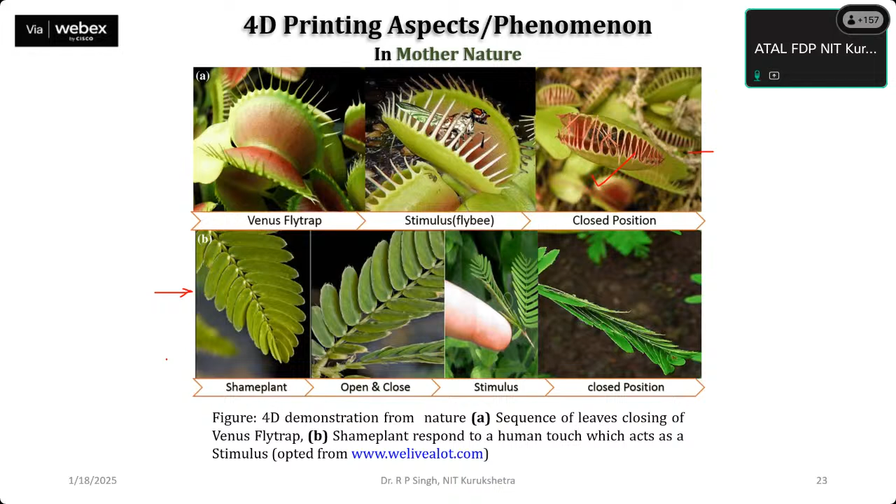Another plant - most of us have experience with this in our childhood. Our finger is behaving like the stimulus, meaning that the touch of our finger on these leaves allows them to become closer, and then over a period of time, they separate again. So how things change over a period of time, over a period of situations, makes a difference.

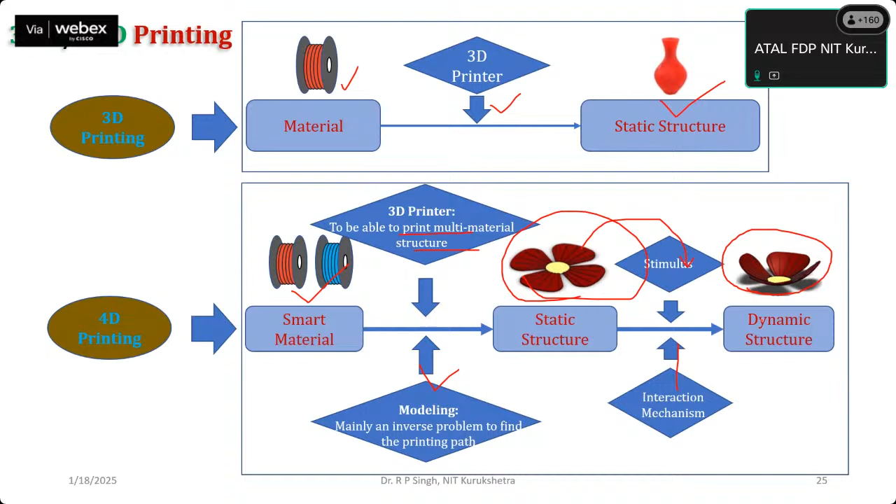This is another example - any conventional material, but how things go in case of 3D to smart materials, definitely there is an inverse problem to find the printing paths, and the static structure is formed accordingly. The stimulus has to be programmed accordingly so that the smart material is selected to behave entirely as per the application, and the interaction mechanism is also planned accordingly, so things are going to behave entirely different in case of the dynamic structure.

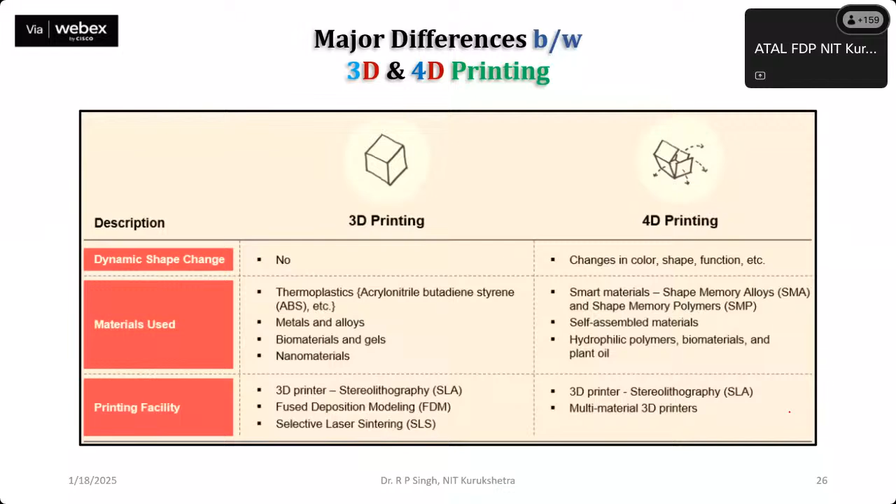Earlier it was not programmable in case of 3D, but fundamentally, thermomechanical training can be provided to smart materials so they behave differently under different changing scenarios.

In case of applications, you can see even 3D applications in engineering, automotive, aerospace, robotics, etc. Smart textile is now very common. What about 4D printing? It adds dynamic behavior to all the printing applications.

It means our product is going to behave dynamically under the case of different applications.

You can see the scenario of how things came into picture earlier. If we directly print our part, it will require a huge printing space, printable area, and it will also add to the cost of the 3D printer because the size is very large. So to solve that, we have initially printed it into a different, smaller domain using smart materials, which requires less space.

But once the external situation changes - whether it's moisture content, humidity, water involvement, power, heat, or magnetic field - stage 1 becomes stage 2, and the printed part becomes enlarged.

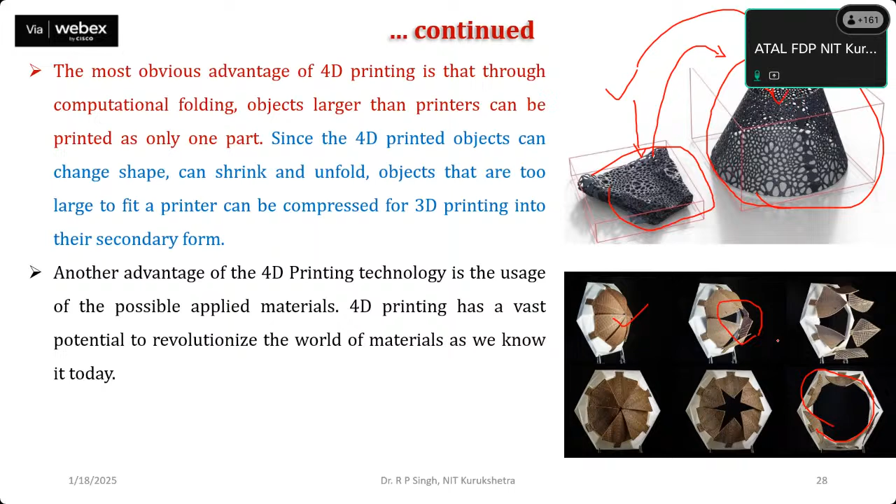Here's another typical application where wings are initially closer, and over time and under temperature conditions, they keep on changing. At the end, all the wings are fully open for this typical application, and the space is fully open to all.

Again, this is a very basic discussion about 4D printing and its materials. If we're looking at applications in the domain where temperature is going to change, those can be concluded as thermo-responsive materials.

For that purpose, shape memory materials are utilized - they can be shape memory alloys, polymers, hydrogels, or ceramics. If there's variation of water or moisture, there can be water or moisture responsive materials.

If the situation involves variation under the effect of light being exposed, those are called polymer gels, utilized for that particular application.

If variation under the effect of current is being utilized - say you make a 3D printed product for an application where the current keeps changing - the evaporation effect of ethanol and water comes into picture, and those materials are called electro-responsive materials. If the situation involves a change in magnetic field, they are called magneto-responsive materials.

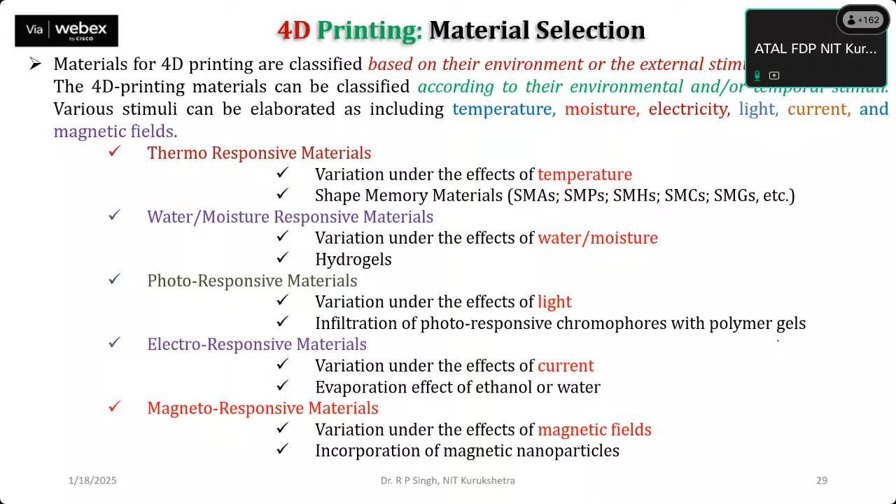So that was about that. Now for the discussion about the effect of heat - there's the shape changing effect, and these materials are called shape memory polymers, or high thermal expansion materials.

If photoresponsive materials are involved, they can be called shape memory polymers. And if electromagnetic materials are involved, so that they can behave differently, they are called electro-responsive hydrogels.

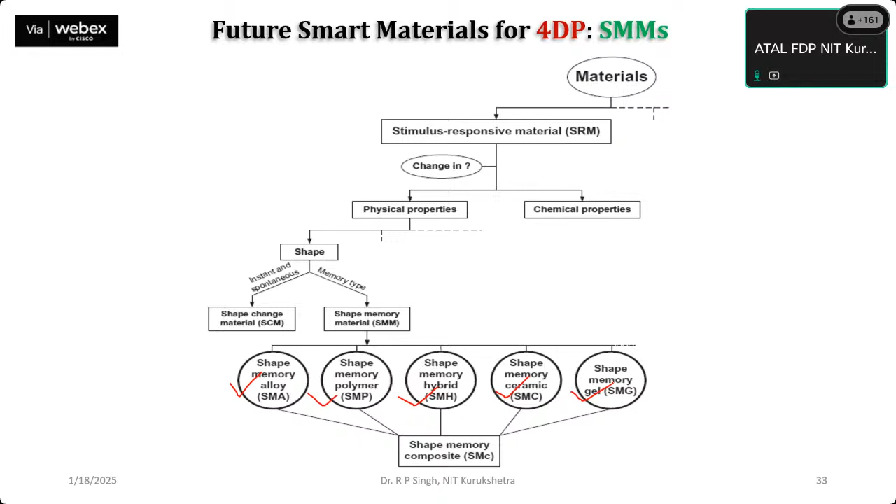So future smart materials. If we talk about 4D printing, shape memory materials are involved. They are fundamentally classified into shape memory alloys, shape memory polymers, hybrid materials, ceramics, and gels. One by one, we will see how they can be further classified.

It is shape memory polymers, obviously. If they are categorized into different forms, one consideration must be there: the selection of stimulus. It is not randomized, it must be well planned and programmed. So if the material is printed out using a selected 3D printing method, under what particular situation is this developed product going to behave and apply for a certain function?

Whether the temperature is going to change, the pH value of the solution, the water, solvent, magnetic material, moisture, humidity, light, oxidation, reduction - based on that, we have to think about the shape memory function. There can be one-way shape memory effect, two-way shape memory effect, triple shape memory effect, or multi-shape memory effect. In the coming slide we will come to know exactly what this shape memory effect is and how it can be utilized.

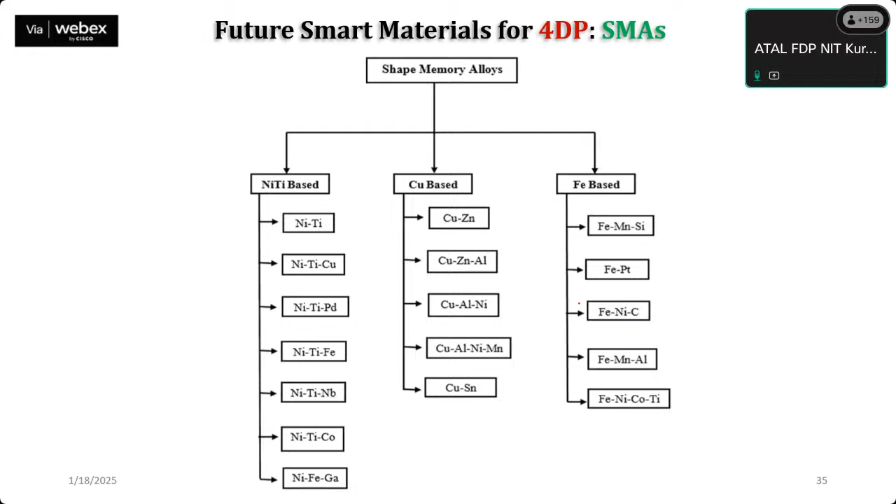For these 4D printing applications, the future smart materials again - the representation about the variety. Fundamentally they can be like CuZn, FeMn, Si silicon based, NiTiPd, copper based, etc. If we talk about different shape memory polymers, shape memory alloys, shape memory ceramics, they have their own versatile applications in different domains. So this is the shape memory polymers, shape memory alloys, and ceramics here.

The concept of shape memory means that when the material undergoes loading, unloading, and heating conditions - for example, the stress and strain diagram is drawn. It is seen that once it is provided with the loading condition and unloading, and after application of heating, ultimately the material behaves as it was at the initial beginning, meaning the original phase.

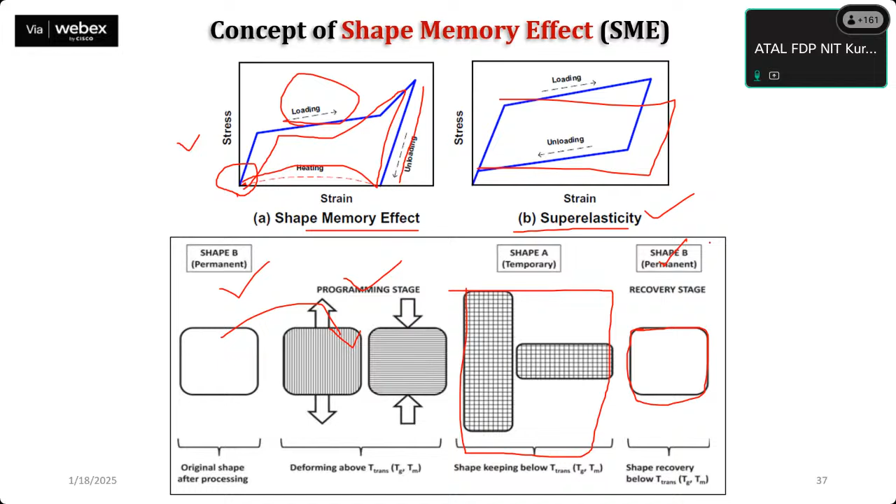This is the very fundamental example of how the permanent shape, the programming phase, and temporary phase came into picture. This is the case where we are programming our developed 3D printed material - this is the temporary phase. Once the temperature conditions are applied, the recovery phase can be seen as permanent. So under different temperature conditions, we have programmed our developed material so that information can be lodged, and the lodged information can be released where the application is ultimately to be provided.

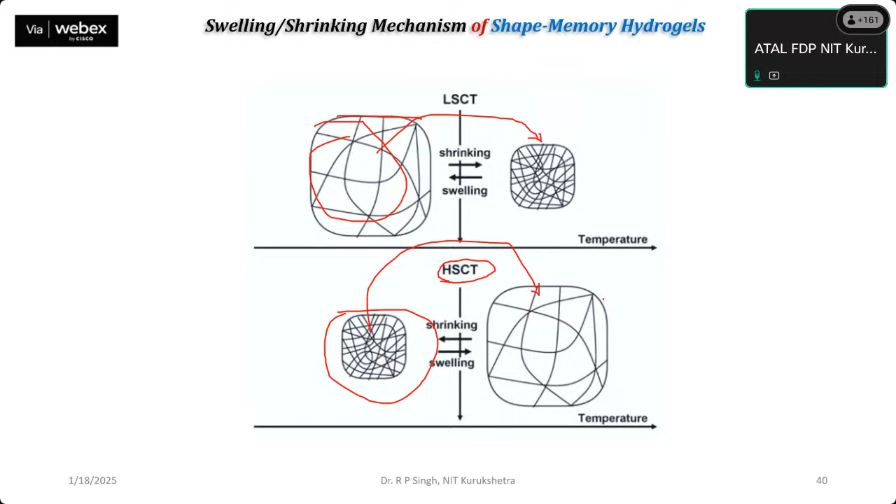If the situation is opposite, then we have to think about the high solution critical temperature situation, where the small material, meaning the low volume material, becomes a large volume material, and vice versa. Okay, so this is very interesting.

This is the case where the shape memory effect is applied and the shape reverses upon removal of the stimulus, meaning we simply turn the stimulus on and off.

Suppose you have printed material A that behaves differently, where heat generation or temperature variation is going to act as a stimulus. Once you press your heat exchangers or whatever facility you have, you are changing the temperature condition, and the A product becomes like B. Once that heat or temperature condition becomes off, your B material will directly convert back to A.

This is simply called single change. Another one is one-way shape memory, meaning that after the original shape is recovered from the temporary phase, a new programming step is required to recreate the temporary phase in each cycle.

It means the developed or 3D printed part is concluded as A. Once your heating, cooling, or moisture stimulus is on, it becomes like B. After the application of another stimulus, suppose here water content or moisture was stimulus 1, and here the temperature ranging condition is another.

Suppose when the humidity is up to a certain level, A becomes B, then B becomes A again after variation of the temperature.

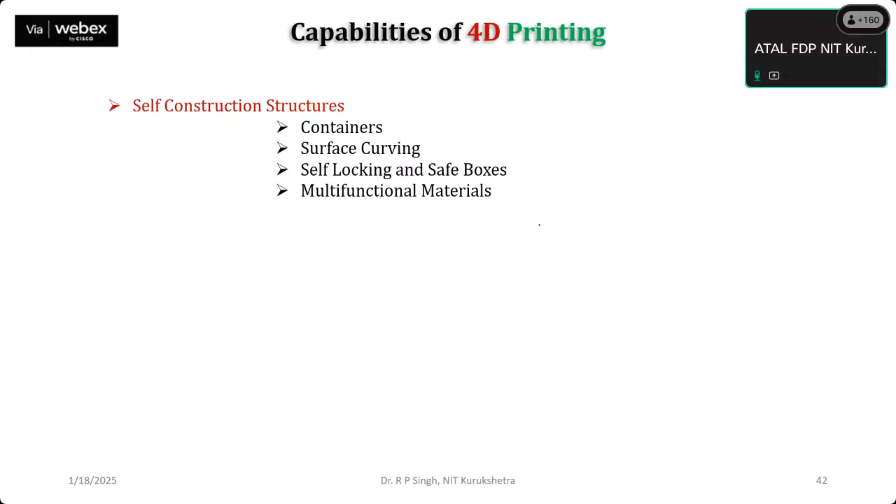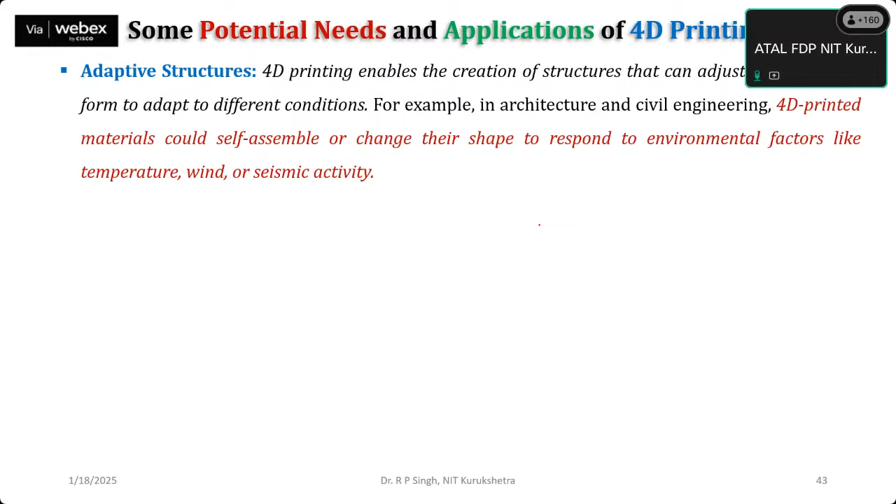Soft robotics can also be part of the applications. Some potential needs can be adaptive structures - obviously 4D printing materials could self-assemble or change their shape as per environmental factors.

The programmable materials are another very smart feature of this 4D printing technology. If we talk about smart medicine, nowadays it's being reported in the literature by research articles presented by various researchers and investigators around the globe.

They have concluded that these can be used for drug delivery systems that can release medication into the human body for healing at a faster rate.

4D printing stents can also expand and contract based on blood flow, so medical practitioners can maintain blood flow into the human body by providing external medication. If blood flow into any local zone of the human body is being maintained, the 4D printed smart stent can expand or contract accordingly based on the blood flow.

So it is a kind of interactive mechanism - it's not just a possibility with the 4D printed part alone, but it's also required to be well collaborated with medical practitioners as well. Smart textile - very intelligent.

It is also called intelligent textile nowadays. These textiles can adapt to temperature changes, regulate moisture, and provide better protection in response to external stimuli. They behave differently depending on conditions—if there is fog or more cold, they change their properties because they have been smartly designed with smart materials and fibers included. So smart textile is another very good area.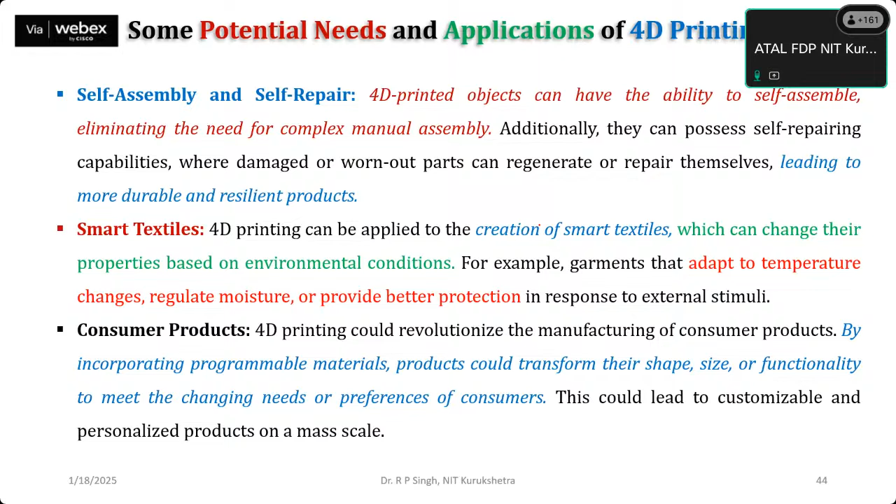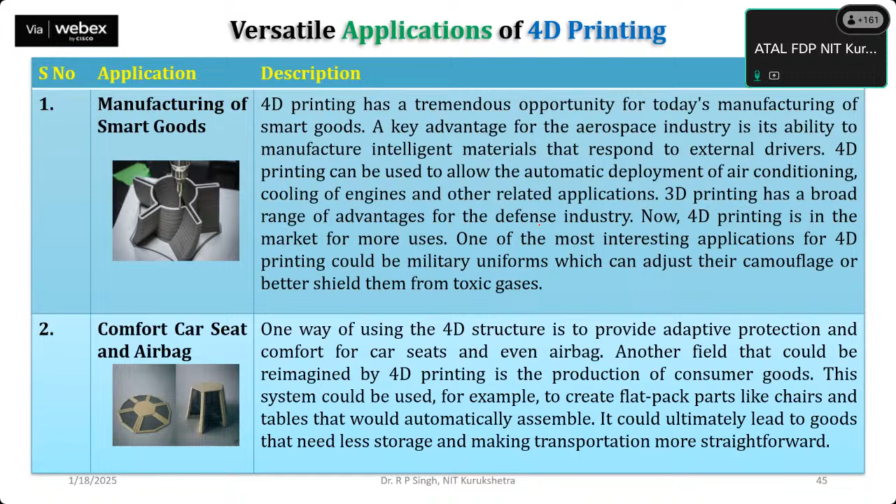Consumer goods can also be produced. So manufacturing of smart goods, comfort car seats, airbags—once a load is applied, they become stronger. Smart plumbing devices have the capability to maintain flow and respond to flux and water demand, so the diameter of the smart polymeric plumbing devices can vary, and flow rate can be maintained according to demand.

Production possibilities will obviously be there, and complex assemblies we will see in the next slide—Adidas, the shoe making company, came into the picture with digital light processing methodology, and smartly developed the shoe sole with a 4D printing methodology. Smart textiles have already been discussed here.

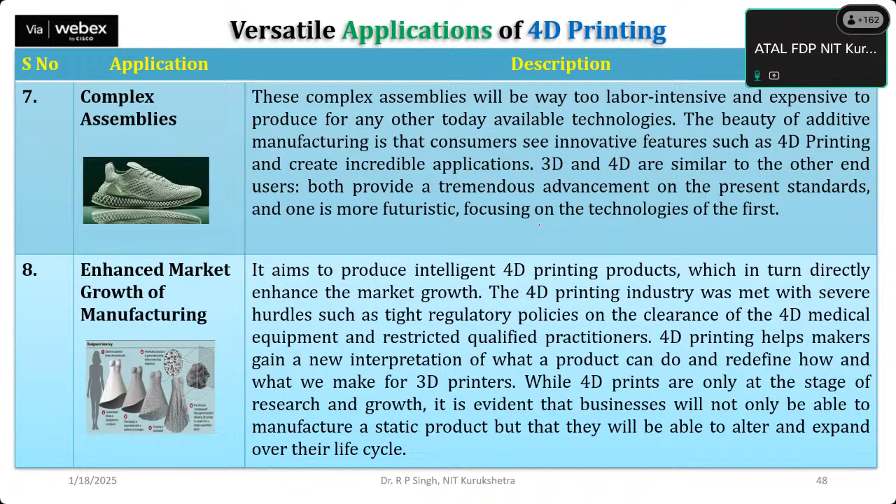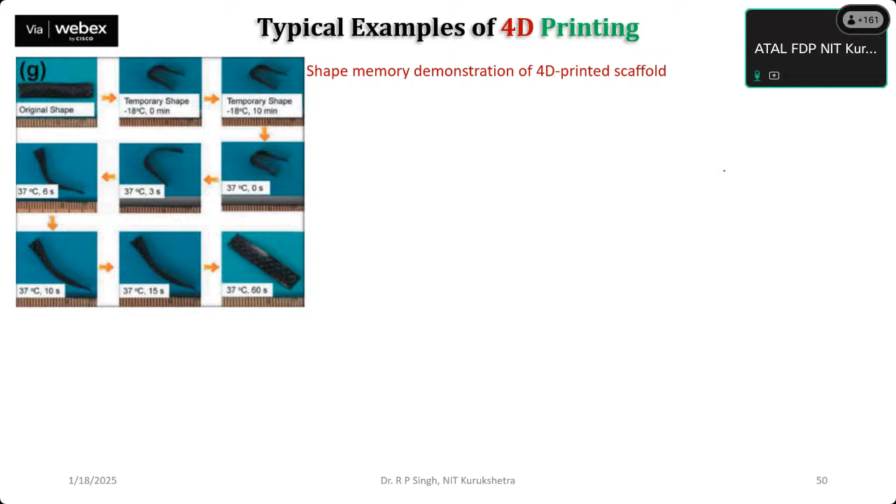These are certain applications like 4D printed smart scaffolds, where space is provided and pores are created so cells can ultimately grow—very common in bone fracture conditions in human beings. This is the example I was talking about, where digital light processing and sintering processes are applied.

Coming directly to bio-organ printing, how it can be done—this is the era of tissue engineering also, where implantable organs are rectified and applied. In the initial phase, a bone defect comes into picture, and we inject a solution for sol-gel transformation at the site of the defect.

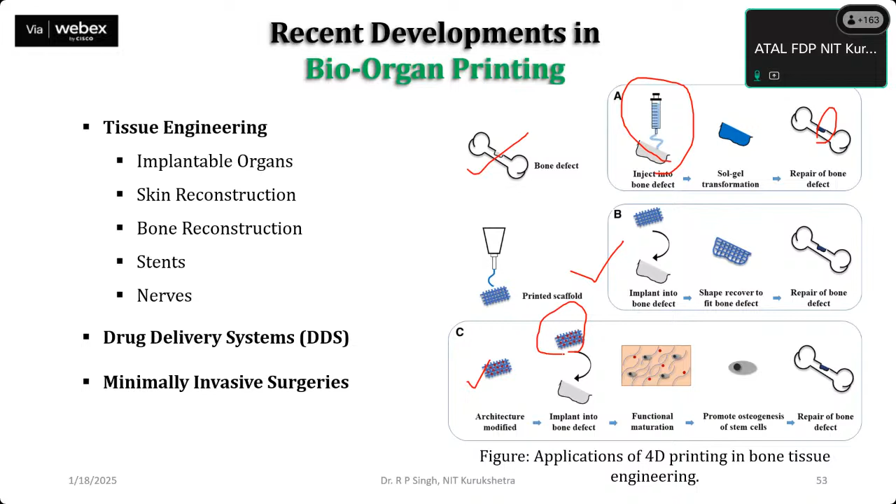In the second scenario, printed scaffolds are utilized. If they are 4D printed, the architecture is fundamentally dominated and well modified, and these 4D printed smart scaffolds are applied to the bone defect zone with small pores so that the osteogenesis process is more enhanced, functional maturation of cells occurs, and ultimately bone repair is achieved as a solution. This is a very fundamental application.

The physiological environment, as I mentioned, relates to the physiological condition where the temperature may be related with the blood flow pressure. So it is with the intervention of medical practitioners that the drug will be released, and the human being will become healed.

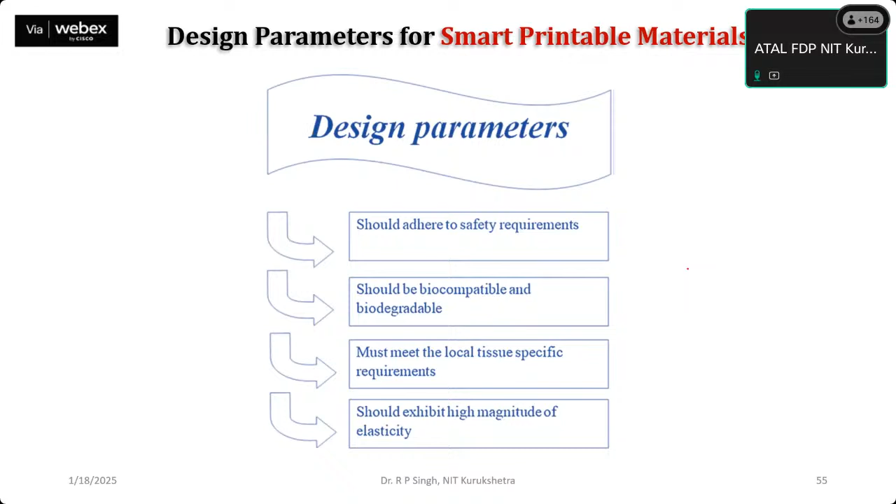So we have to think about smart biomaterials, the smart medicines. It is not as simple as in the case of 3D or 4D printing foods. We have to think about how the compatible materials should be arrived at, then only the printing can be proposed. So this is ongoing research.

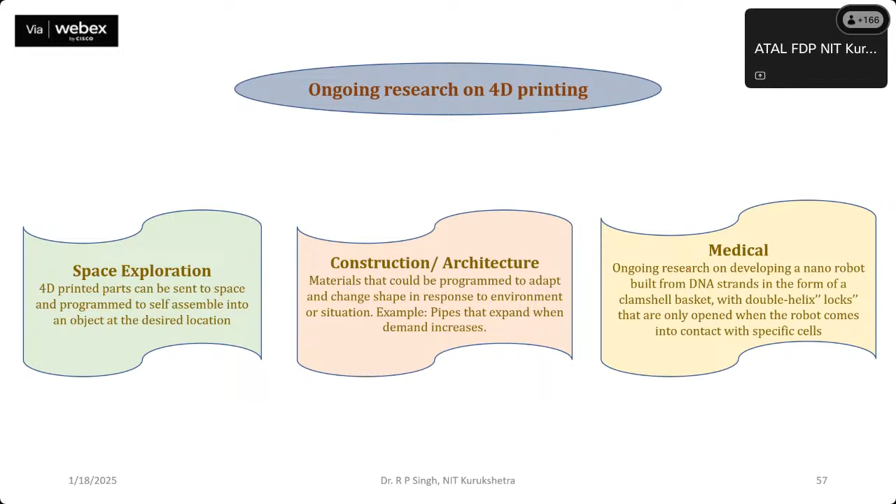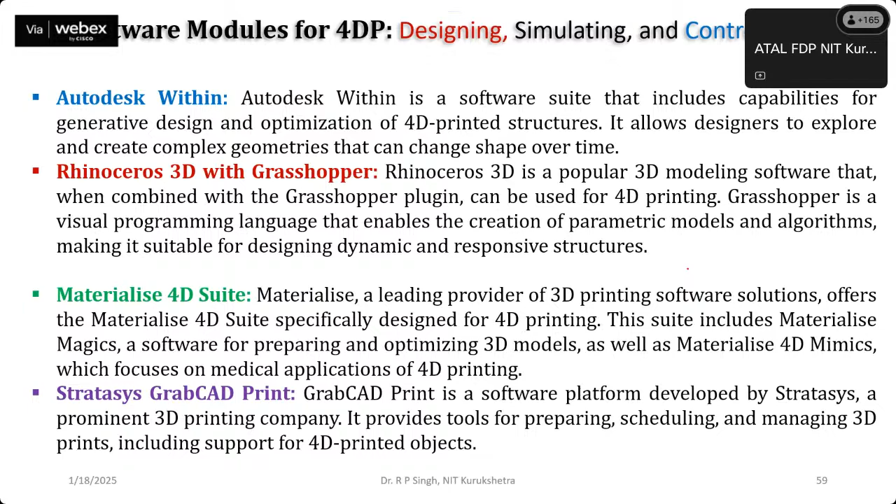For that particular purpose, a lot of software is also available - it's about Autodesk Within, Rhinoceros 3D with Grasshoppers. The Materialise 4D suites are also there, and they are very common while we deal with 3D printing methodology, but an additional module of 4D printing is also available with them. There's also GrabCAD print - they are providing assistance also, including 4D printing parts, and assisting in providing the methodology towards 4D printing applications.

So opportunities, if we talk about, obviously a lot of applications are there. We are dealing with the era of Industry 4.0 and nearly expecting to become like Industry 5.0 with the encouragement of 4D printing, since it will help in concentrating on the design process rather than manufacturing, because once things are designed very smartly, we can expect them to get printed and applications can be proposed.

Obviously, in the mid of 2025 and up to the end of 25. So what we can feel is that a 4D printer with the potential of the biomedical sector was proposed by researchers at Universidad Carlos III de Madrid, UC3M.

So they have proposed a smart 4D printer where multiple materials can be managed. A lot of information is available over Google, so I request you to explore it, because the more you explore, the more applicable it will become. By the end of this year, we can expect that I-Seed's 4D printed robot can assess the quality of air and soil. These are biodegradable applications, developed through the collaboration of Trento University in Italy.

Obviously the things are being very advanced, so a lot of challenges and opportunities are also there. It might be that my slides are visible or not, I'm just confirming that.

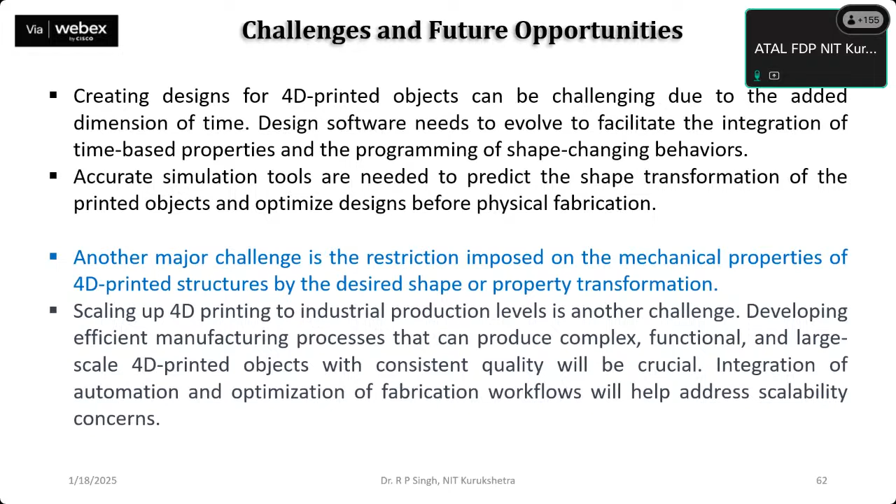The scaling up of 4D printed parts is another issue - we have small components of this plant printed and programmed for certain scenarios, but what about bigger applications, where scaling up the 4D printing methodology is needed? The 4D printed objects need to be consistent enough. The challenge is also about inaccurate actuation, lack of control of intermediary stages of deformation, and limited material availability. Many queries were there about materials - smart shape memory materials are being developed, so the list is long, but we have to think about availability as well.

We have to explore the list, or we can see the magazine of materials. It is not always possible to find the material from procurement. Sometimes we also have to think about the development of those materials.

The property changes occur as a result of macro scale structural transformations, which may be undesirable. It hardly matters in some applications, but for typical applications it matters a lot. There can be different picturization during the process, so things should not be like that, where we keep changing the shape memory effect under different stimulus conditions, like stimulus A or stimulus B. The material selection and application must be targeted so that under stimulus A, the properties of that particular material do not become changed and varied undesirably.

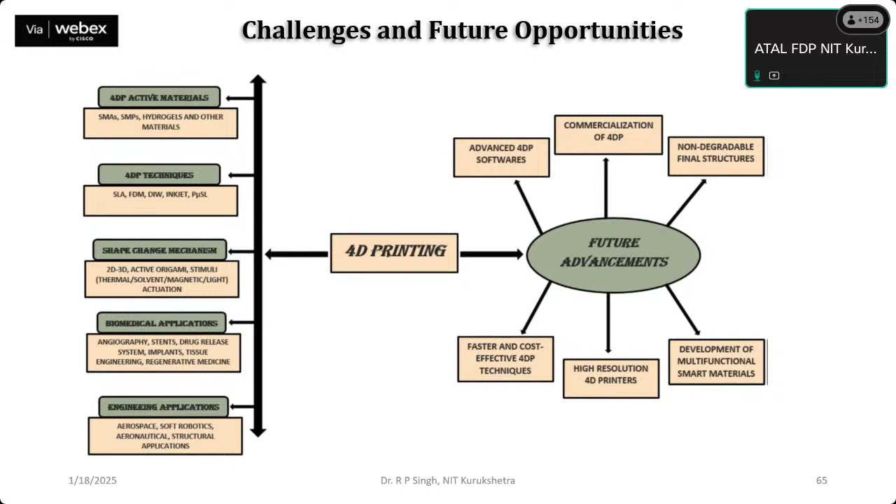If we look at global research institutions, and some of you are aspirant in the domain of 4D printing, you must follow the MIT Self-Assembly Lab reports. Over time they launch new work. Also follow Harvard's Wyss Institute for Biologically Inspired Engineering, the University of Wollongong in Australia, the Singapore University of Technology and Design, and many others. Please keep searching and keep following those research laboratories. They are doing a lot of work in this area.